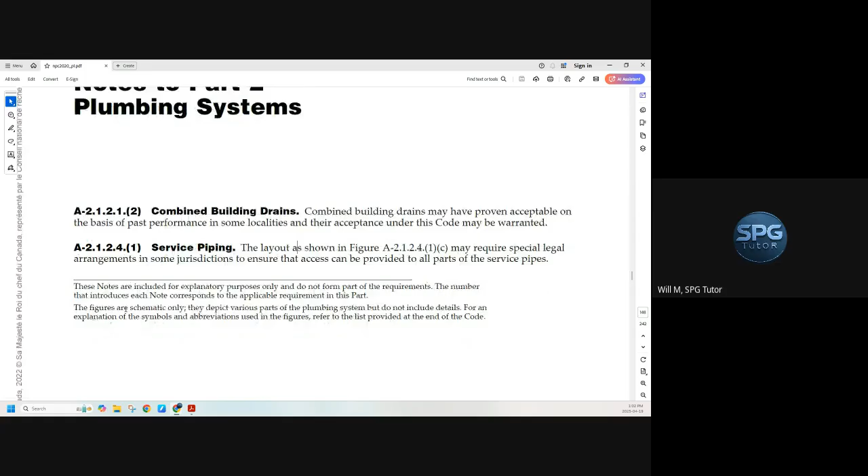Now, it says right here, these notes are included for explanatory purposes only, do not form part of the requirements. The number that introduces each note corresponds to the applicable requirement in this part. So yes, it is for explanation, but being one of the people who actually writes these exams and is part of the committees that do that, we take them off the pictures because you guys never look at them, right?

So give you an example off this first drawing, there are 4 potential red seal questions you might get off of it. The first one with the first picture is: can I feed an auxiliary building with the same services on the same property? So that could be a garage, could be a coach home. Yeah, that's allowed right here.

Can I feed a duplex or a townhouse with separate services? Yep, that's allowed too. Can I feed them with the same services? Yep, that's allowed, as long as there's independent shutoffs in both portions, or in all the portions. Then the last question is going to be: can I feed an adjacent property with the same services? And the answer is no.

Reason for that is because, again, you have to remember that no one knows what you're doing on your property.

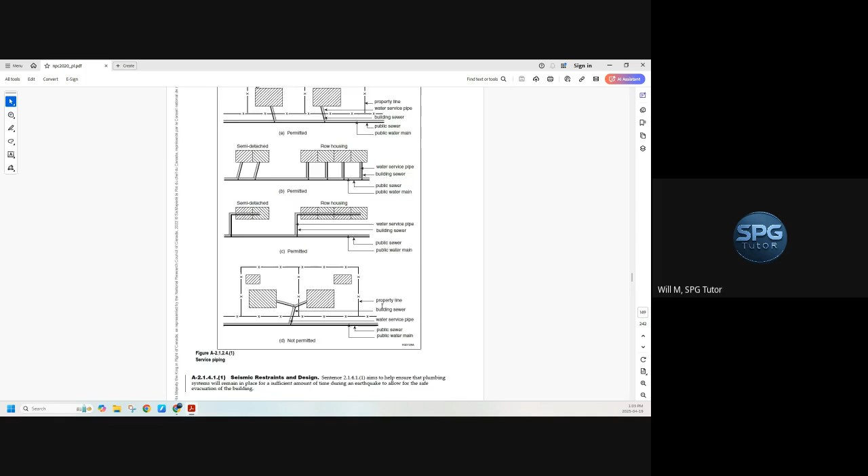Seismic restraints. So a lot of you guys don't have to deal with seismic across the country, but in places like BC, we're going to have seismic restraints that we have to put on hot water tanks and things like that, or even on the piping.

It's usually done by one of 2 ways on the piping. Either it's going to be a riser clamp with 1-inch pipe at a 45-degree angle going up to the ceiling, or it's going to be with aircraft cable. It's your other option.

This picture here, a couple of questions that you might get. How many shower heads can be served by 1 shower drain? Well, even though this says not permitted, you can count them, 6, right? If we look at this one, we've got 1, 2, 3, 4, 5, 6, 7, 8, 9, 10. How many shower drains do we need? 2. Okay, so every 6 needs a drain.

Now, the reason why we talked about this before, they don't want it sloping off to one central drain typically, and that's because no one wants your foot fungus, right? No one wants anything that might be on your body to touch them. It's not sanitary to do that.

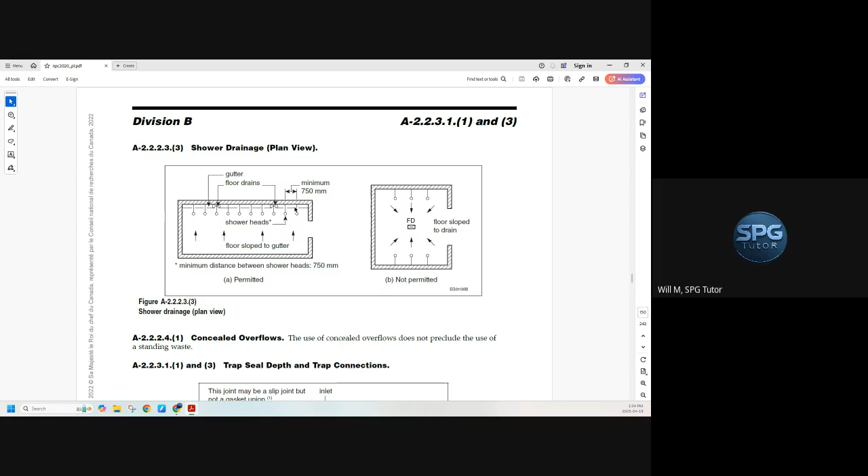Another question you might get on this is: what is the minimum distance between shower heads? Right here, 750.

Okay, concealed overflows. The use of a concealed overflow does not preclude the use of a standing waste. So a standing waste is basically a floor drain that comes out of the floor, usually for like a clawfoot tub or a Roman tub. Let me see if I can just find a picture that's a good one.

No, I can't. So I'll have to leave that for now. Oh, maybe. Here we go.

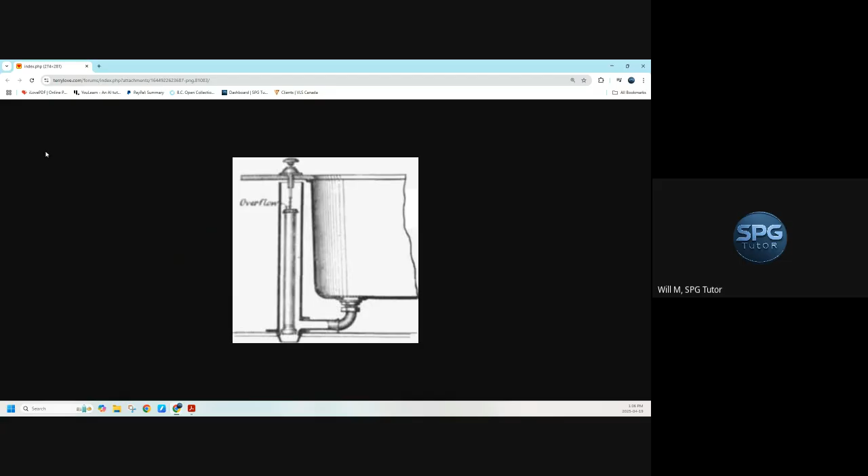Okay, so this isn't a very good picture, but you'll get the idea. So this is what a standing waste is. You can see here that we have an overflow in part of this tub, and if we want, we can pull up on this knob to activate it. Another image of what it might look like is something like that. So that's what it is.

It typically comes out of the floor.

That's your standing waste.

Okay, this picture here, A22311 and 3. So a couple of questions you might get from this is, where are we allowed to use slip joints? Well, we're allowed to use it to connect the tailpiece. We're also allowed to use it right here on the outlet after the P-trap. But we're not allowed to use gasketed unions here. We are allowed to use them here.

You might get a question, how is the trap seal depth measured from where to where? So that would be from the trap dip to the trap weir. Okay, so right here, so this is the weir, and this is the dip.

Next, prohibited traps. Except for an S-trap standard, S-traps are prohibited by Code Clause 25631B, which limits the fall in the fixture drains. Crown vented traps shown in that figure are prohibited by Clause 25631A, which requires that the distance from the trap weir to the vent be not less than twice the size of the fixture drain. So we all know that's code.

Now, a trap, okay, the two trap standards we talked about before. We have the P-trap standard, which is for janitor sinks, and then we have an S-trap standard, which is a toilet, essentially.

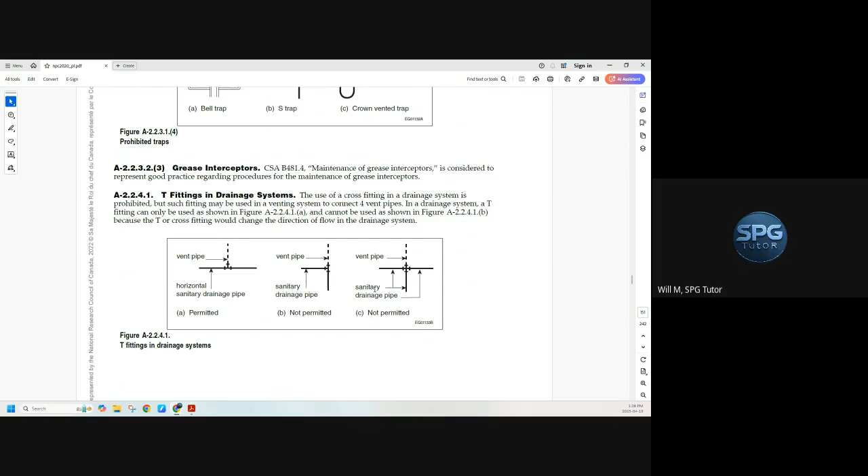And then same thing with Sani T's. Where can we use them? This says these are not permitted. It says use a Y and 1/8 bend. So just a reminder, the 1/8 bend is a 45-degree fitting.

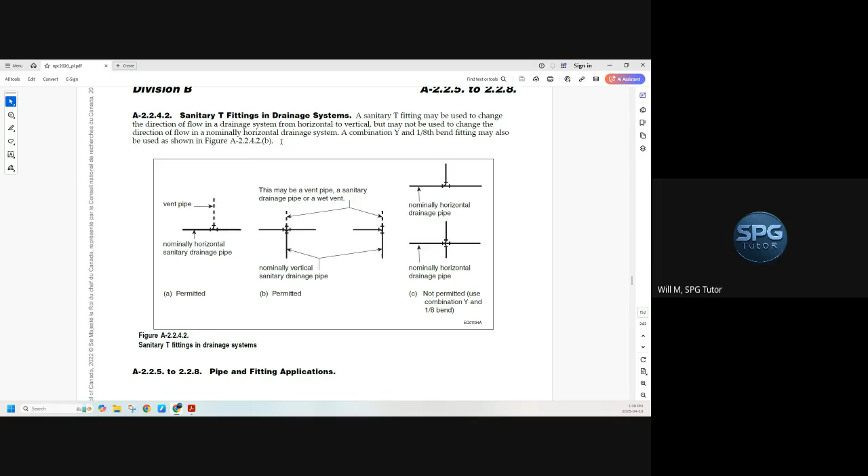And it says up here, a sanitary T-fitting may be used to change the direction of flow in a drainage system from horizontal to vertical, but may not be used to change the direction of flow in a nominally horizontal drainage system. So that might be important also.

This guy, your permitted, not permitted table. You will get probably quite a few questions on this. Now, again, depending on the edition of codebook you have, if you have a 2015 first edition, you're going to have asbestos cement pipe on this table, and you're going to have multiple references to asbestos. Don't worry about it. They can't test you on that anymore, okay?

Because it's not in the 2020. You're going to have a question on this. Polyethylene water pipe and tubing. Series 160 size with compression fittings. Okay. So where are we allowed to use it? Underground, under a building, and outside of a building.

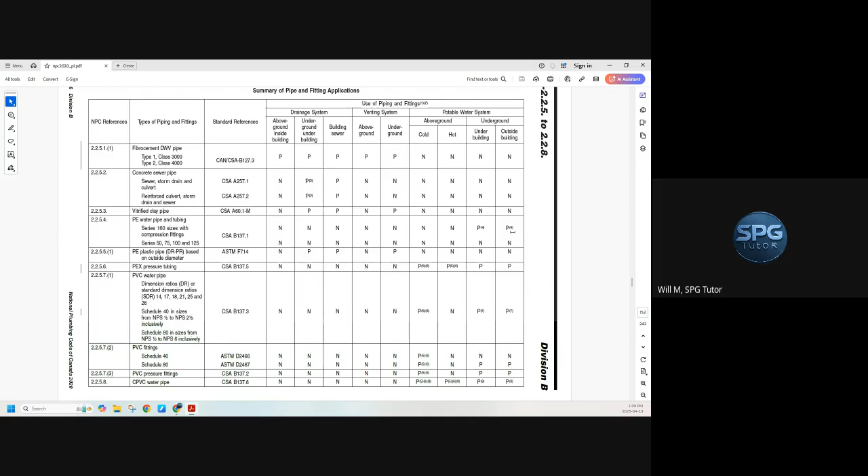So you see these little notes here, these numbers? Make sure that when you're going through this, you come down to here and you read what it says. So permitted only for water service pipe. So that Series 160, we've talked about it before, only for water service.

PVC, okay, we've talked about SDR numbers before. So if you remember, SDR refers to, it's called standard dimension ratio, and it refers to the outside diameter divided by the wall thickness. And off of tables, that can give you a standard pressure rating of that pipe. Now, again, with pipes with the same SDR, they're going to have the same pressure rating on both of those.

Yeah, so always look at these little numbers. And if you come across a question like this where you have to use this permitted, not permitted table, make sure you check out the code clauses that are in here also.

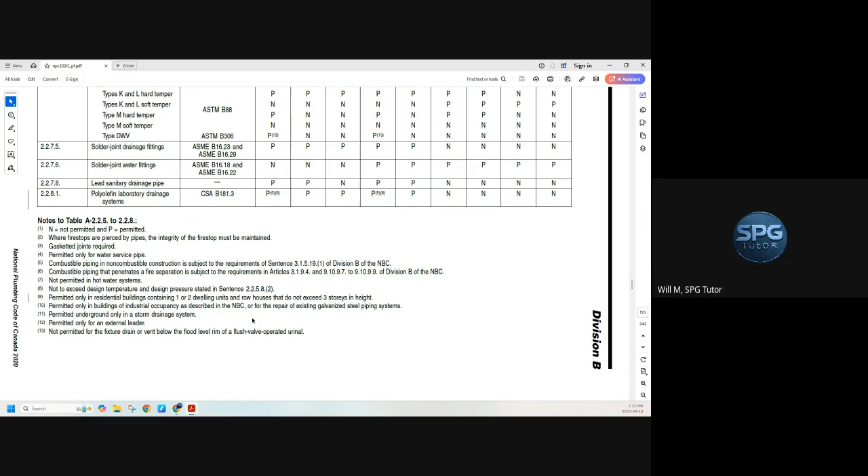So yeah. Now, remember down here, we always have these references throughout the code book, and I mentioned it a couple times. It says permitted only residential buildings containing 1 or 2 dwelling units and row houses that do not exceed 3 stories in height. So single family homes, duplexes, townhomes. There's multiple mentions in the code book about that. Okay.

All right, concrete pipe. No, we don't care about that.

This one here, A22551, polyethylene pipe used underground. So joints within high density polyethylene pipe, HDPE, is the same thing as polyethylene, just high density. Shall be heat fused according to manufacturer's instructions. Joints between high density polyethylene pipes and other materials shall be made with a suitable hubless coupling. There's two questions right there: how is a joint made in HDPE? It's heat fused with an iron, right? Or a hubless coupling, yeah, we can join it that way too.

Okay, solvent cement. Often this shows up, might ask you the color code, might ask you the color for transition solvent cement, let's say. So let's see where that is. PVC is gray, ABS is yellow, CPVC is clear, and transition is white. So if we're remembering what types of pipes we use with transition cement, it's ABS and PVC.

This guy we don't really care too much about. Nope, nope.

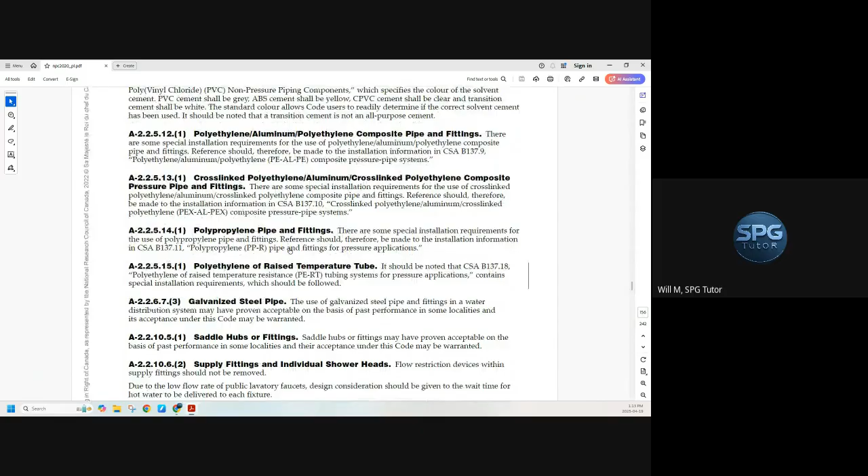Galvanized steel pipe, so this is similar to the combined building drains idea. It says the use of galvanized steel pipe and fittings in a water distribution system may have been proven acceptable on the basis of past performance in some localities, and its acceptance under the code may be warranted. So again, depending on where you are, if you're in the middle of nowhere, maybe it's allowed. Same thing with saddle hubs and fittings, so even though the code says we're not allowed to put those in, it may be acceptable in different places.

Okay, flow restrictors on shower heads. Some of you guys take them out just so you get beaten up by the shower every time, right? What this is saying, you got to remember where this is in the code book, it says flow restriction devices within supply fittings should not be removed. Again, it's not saying shall not, it's saying should not.

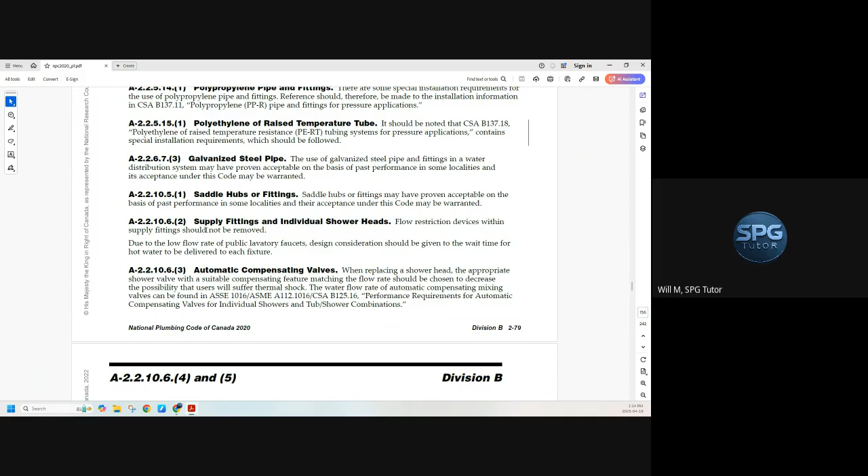Examples of water shut-off devices include occupant sensors and self-closing valves. So these are going to be for public facilities, and it's going to be your infrared sensors or your push-button timed valves.

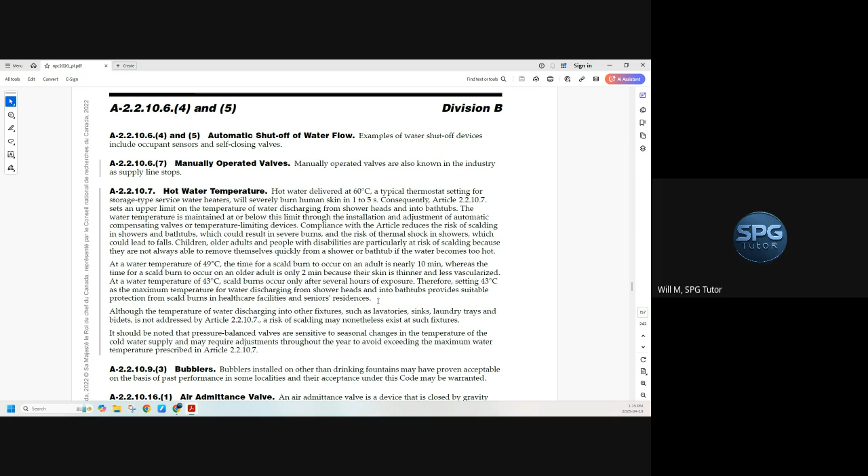Something that's different in the 2020 versus the 2015 is, remember the 5 temperatures that we need: it's 49, 60, 75, 99, and 540 from the code book. Now 60 is your hot water heater set temperature. We know that the maximum temperature discharging to a bathtub is 49 degrees. What they did in the 2020 was they added this, making it 43 degrees in healthcare facilities or seniors residences. Again, they won't ask you about this, but it's good to know for installation in the field, that it can only be set at 43. Reason why people who are sick might be more susceptible to heat, and old people typically have thinner skin, so they could probably burn a little bit easier. So that's a new requirement of the 2020.

Air admittance valves, do we need here? This is an important point: the material of the diaphragm can be damaged by exposure to acidic or corrosive fumes in ambient atmospheres. Therefore, air admittance valves should only be installed in locations where there's not a potential for exposure to such fumes. So that might be a question: where can I not install them? Well, anything that has acidic or corrosive fumes.

Okay, this one's fun. So you're going to have a coefficient of pipe expansion question. Everyone does, it's on all exams every single time. Now, if they don't give you a coefficient, what you want to use is this drawing, and this drawing isn't really that complicated to understand.

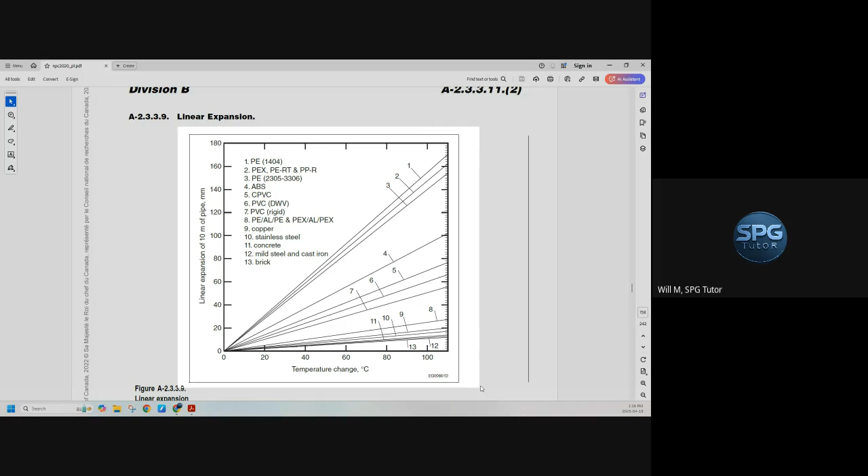I'll show you. Most likely they're going to talk to you about using ABS. But what we can do is, let's say the question says I've got 100 meters of, let's say, ABS pipe, install temperature is 10 degrees Celsius, and it's run at 40, whatever it is. Okay, so the first thing we do is we figure out the temperature difference, the delta T. So 40 minus 10 is going to be 30 degrees Celsius. So that puts us here.

Now, ABS is that line right there. So all you got to do is come up to the point where it intersects that line at 30 degrees, and then just draw a line all the way over. That's not very good, try that again.

That's better. It's more of a guess with this, but you can see here that this would be the 30 millimeters, so we're just slightly under that. I'd say probably 26, 27, right around there.

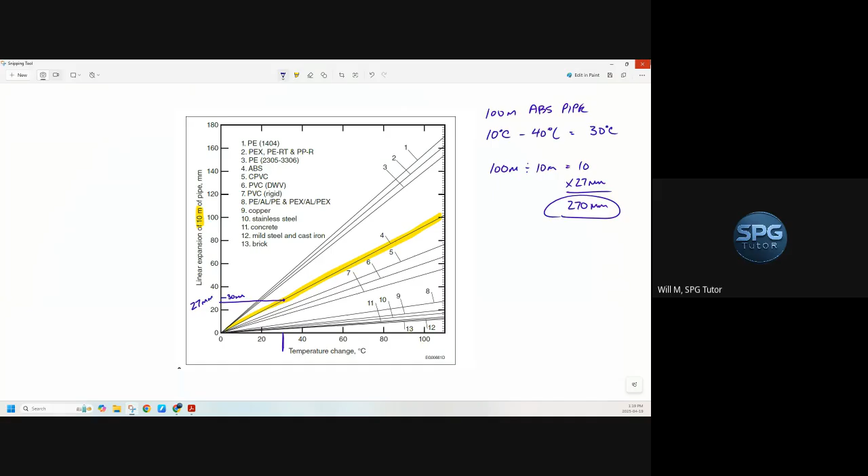So hopefully that works for you guys. Yeah, that's all you got to do, very easy. If you need an example, right here.

Okay, A23391, expansion and contraction. So expansion and contraction in piping systems may be accommodated in a number of ways, including but not limited to piping design and layout, material selection, and the inclusion of expansion joints. That might be a question you guys get - how can we do it? Expansion loops, expansion joints, different things you can do.

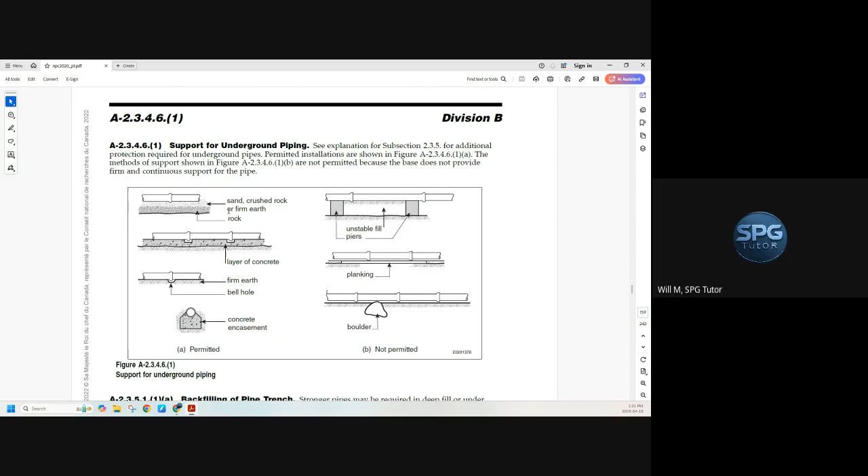What's not allowed? Piers, planking, and obviously a big boulder. I mean, no kidding, right?

Okay, backfilling pipe in a trench. There's a couple questions you might get off of this. The first thing it says is stronger pipes may be required in deep fill or under driveways, parking lots, etc., and compaction for the full depth of the trench may be necessary. But when we're dealing with the minimum, it's 300 millimeters above the pipe. Now this pipe could be installed 8 feet, 10 feet, 20 feet underground - it really doesn't matter. But what it's saying is we need to tamp down at least 12 inches of firm earth above it.

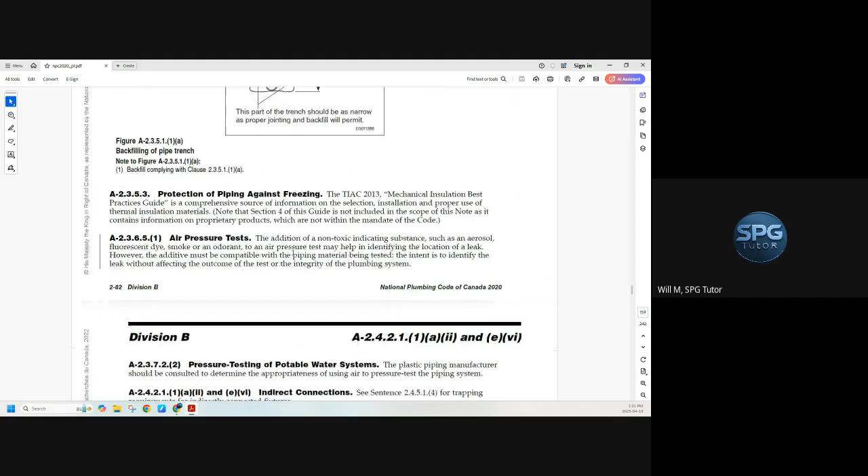This one here, A23651, air pressure test. So the addition of a non-toxic indicating substance such as an aerosol, fluorescent dye, smoke, or other odorant to an air pressure test may help identify the location of the leak. So I've actually done that, and because it does mention it in the book here, that's a more than fine answer.

What can you do if you're looking for a leak on an air test? So what we've done is sometimes perfume, sometimes air freshener - we just spray it down the pipe and then pressurize it with air. And then whichever room smells like perfume or aerosol, that's where your leak is.

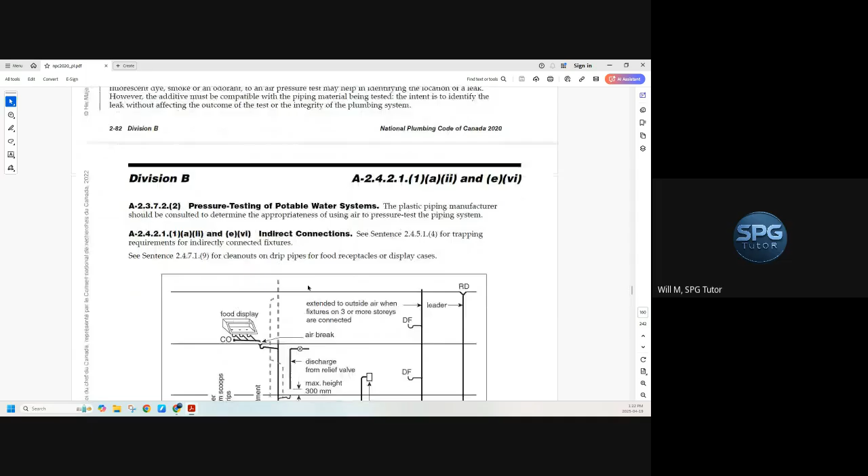This is a good point - pressure testing potable water systems. So the plastic piping manufacturer should be consulted to determine the appropriateness of using air pressure test in the piping system. So what they're talking about is things like CPVC. If you guys use CPVC, you should definitely check if your boss wants you to throw on an air test - check with the manufacturer, see if it's okay. Because what can happen is if you have weak piping, it can actually create a lot of shrapnel if it blows out, and obviously that's not a good thing.

Okay, this one, there are several questions you're going to see on the exam. How is a food display connected to a sanitary building drain? Well, it's trapped and indirectly connected through a trapped floor drain, right from the picture. What do we need to have on it? We need to have a clean out on the upstream side, right from the picture.

Down here we have a grease interceptor from a 3-compartment sink. So how is it piped? Well, it has a vent, and it is piped directly to the sanitary building drain. But what isn't is glass filler, ice cream scoops, coffee drips, and fridge and food compartments. Those have to be trapped and indirectly connected through a trapped floor drain.

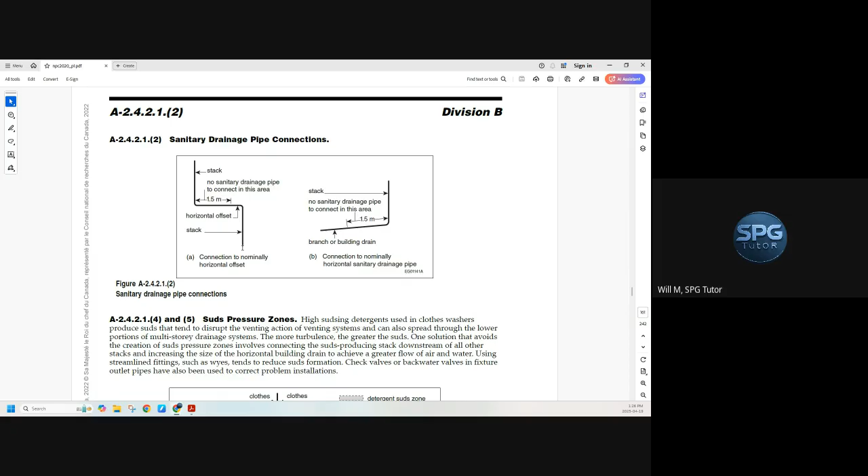Okay, this guy, sanitary drainage pipe connections. So this is a soil stack, and what it's saying is we're going from vertical to horizontal. So this picture is showing us that there can be no sanitary drainage pipe connections within 1.5 meters of that change, whether it's going vertical to horizontal or whether it's offsetting and then going vertical again. So that's a minimum.

This guy, you are going to get a suds pressure zone question, guaranteed. What I would do is I would match it to whichever portion of this picture it aligns with, and then get your answers from there. Now, remember this: it says 40 times the stack nominal pipe size, or 2.44 meters, whichever is less.

So if we do some math on that, let's say I have a 3-inch pipe, times 40, gets me 120 inches. And 120 divided by 12, divided by 3.281. So now, if it's a 3-inch pipe and it's saying 40 times the nominal stack size, so I use 3-inch. So it's giving me a minimum suds pressure zone dimension of 3.05 meters. But what this is showing us here is I don't need to go more than 2.44. So even though my math says it's 3, I don't have to go above 2.44 on that guy.

Yeah, so suds pressure zones compared to the picture, figure it out that way. Anything else in here? No, I think we're good there.

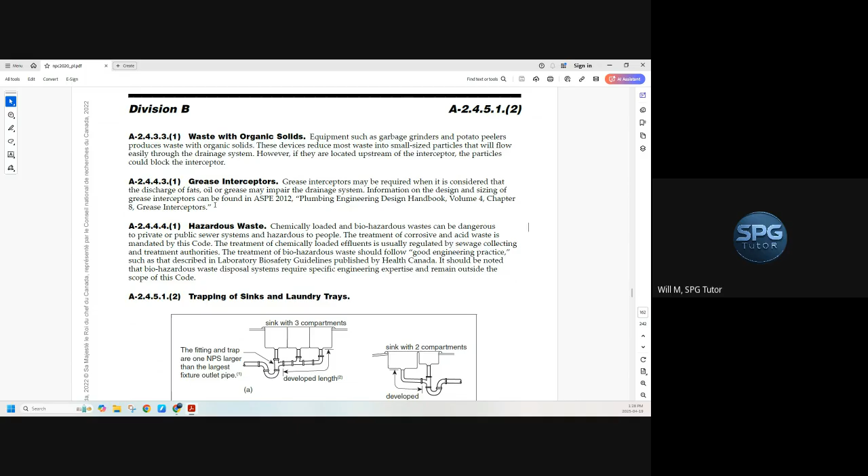This one here is just basically saying that anytime you guys cook bacon, make sure you dump it down the drain. No? Okay, you guys are having fun. All right, what else we got?

Trapping sinks. Okay, so what is the developed length, what is it measured from? Right there to there, there to there, there to there. What is it? 1,200 millimeters. That's going to be a question. So remember, a fixture outlet pipe is another word for a tailpiece, if you want to use the slang. And then this might be your next question on this picture: if it's a 3 compartment, the trap has to be 1 size larger. If it's 2, it can be the same size.

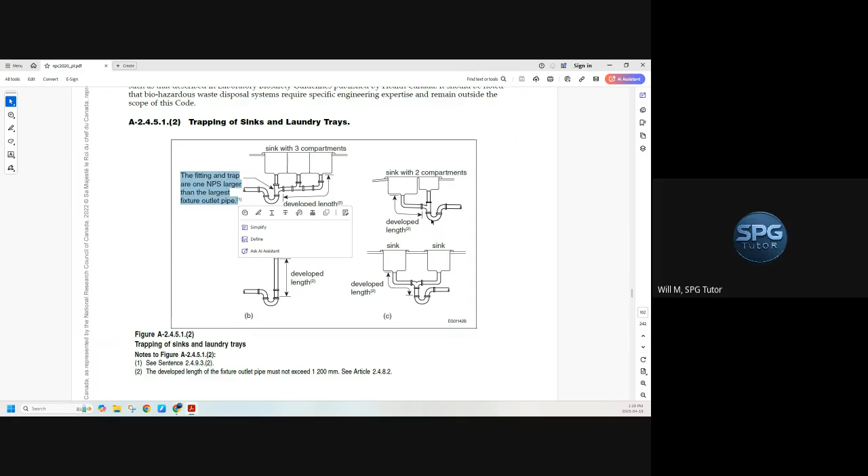Another question you might get is, what does not need to be left indirectly connected while servicing the fixture? Your options are going to be a food display case, a fridge or something like that, or a laundry machine. The answer is going to be a laundry machine. It doesn't need to be left indirectly connected, because we can just pull that little hose out. No big deal. Everything else would be hard piped.

Properly trapped and vented. This is important too. It says where an interceptor other than an oil interceptor serves a group of fixtures requiring more than one trap, each fixture must be properly trapped and vented. And then it says see Article 2552 for venting oil interceptors.

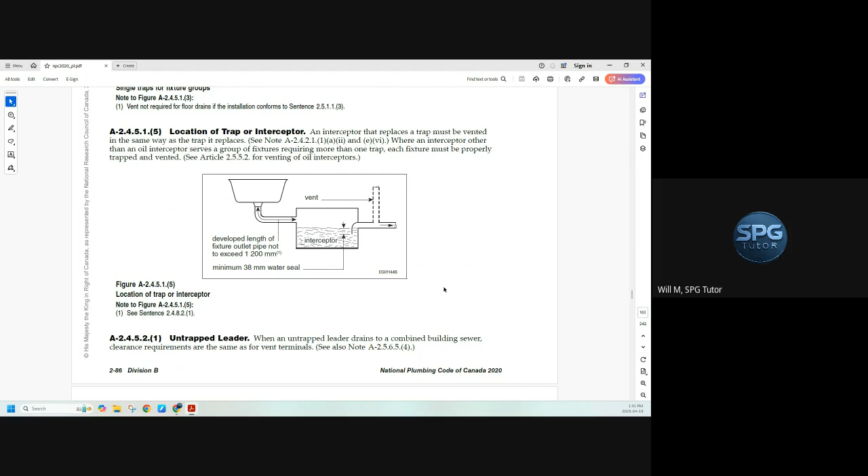24521, untrapped leaders. So when an untrapped leader drains to a combined building sewer, clearance requirements are the same as for vent terminals. I think we're going to see the vent terminals coming up, but just remember that. So an untrapped leader, if you ever get that question, make sure you check the back of the book.

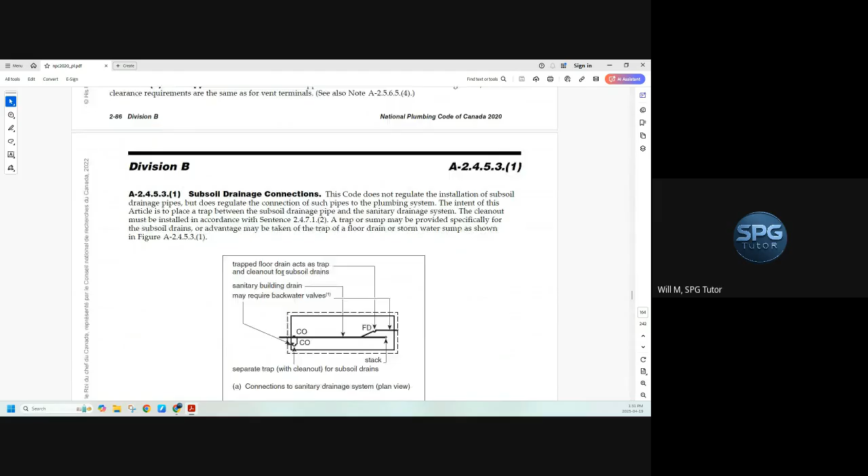Subsoil drainage connections. What do we need from this guy? Not really, except that it does say when we have connections to sanitary drainage systems or a trapped sump, they may require backwater valves. Now you have to remember too that we never have normally closed backwater valves, because that doesn't allow for free air circulation in the drainage and venting system. So it's always normally open.

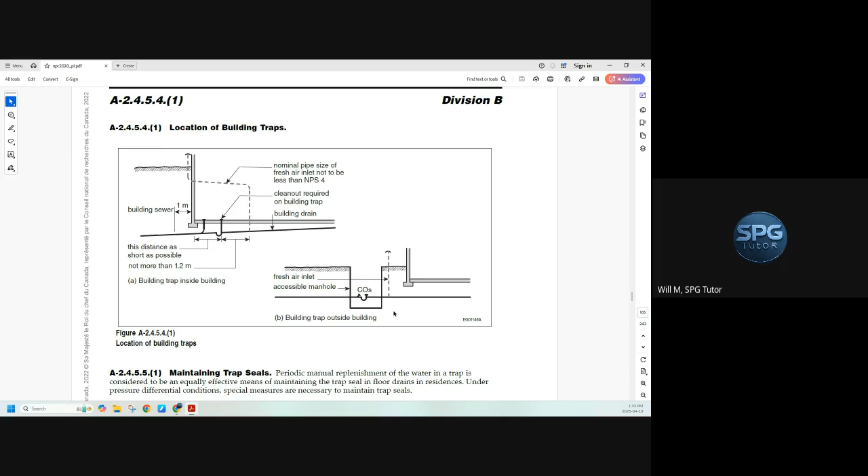Now, where else can we install a building trap? Outside in a manhole. But it has to be accessible, and we have to have a fresh air inlet.

Maintaining trap seals. Periodic manual replenishment of the water in a trap is considered to be an equally effective means of maintaining the trap seal in floor drains in residences. This is a key statement.

So you might get a question: do we need to install a trap primer in a residential floor drain? Answer is no. What you can do is instruct the homeowners to dump a liter of water down the floor drain every month, and that's considered an equally effective means of maintaining that trap seal.

Arrangement of piping at a sump. This is one you're guaranteed to get a question on. It says in most installations, controls will be installed in conjunction with a float to automatically empty the sump. If such controls are not provided, the capacity of the sump should equal the maximum inflow expected to occur in any 24-hour period. So if we have to manually turn that thing on, it needs to be a maintenance guy that comes in once a day, kind of idea.

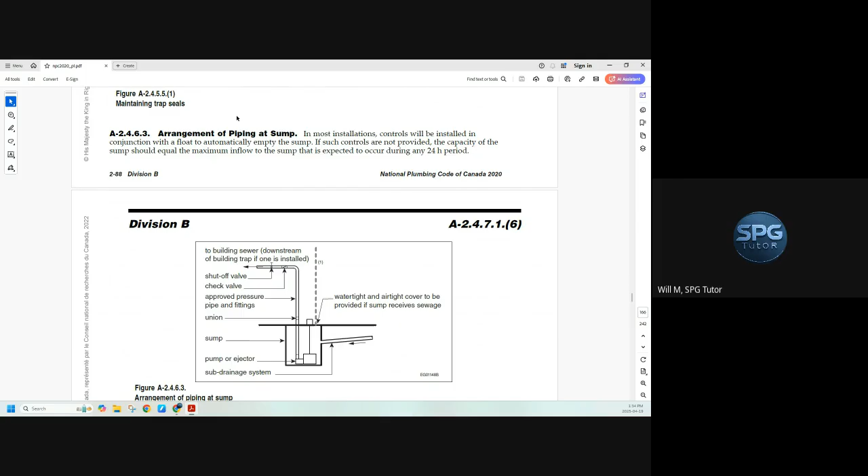Another question you guys are going to see is about these floats. It's going to say there's either the third or fourth float in a sump, and what is it for? It's your high-level alarm. The first two are your normal operating floats. Sometimes if there's 4 floats in a sump, the third one is just a backup or optional. But the question is going to be, what is the third float in a sump for? And that's your high-level alarm.

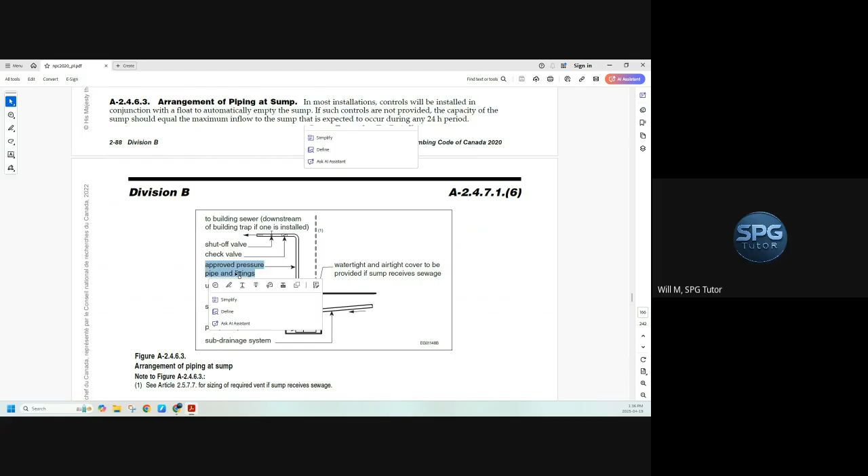Now the next question you're going to get on this: what valves or fittings are installed on the discharge side of a sump? Union, check, shut off, or union, backwater, shut off in the direction of flow - that's what the arrow indicates. These have to be approved pressure pipe and fittings. So when we go back to, I believe it's section 2.2, where they're talking about sewage sumps and force mains and things like that, that's what they're saying with the pressure requirements - that piece of pipe right there.

This point says watertight and airtight cover to be provided if the sump receives sewage. One of the questions you might get is, let's say we have a sump installed in a parkade on the 4th level. What do I need to make sure I have? And it didn't indicate in the question whether it was receiving sewage - it could be a storm sump. So it does not need a water or airtight cover unless it specifically mentions sewage.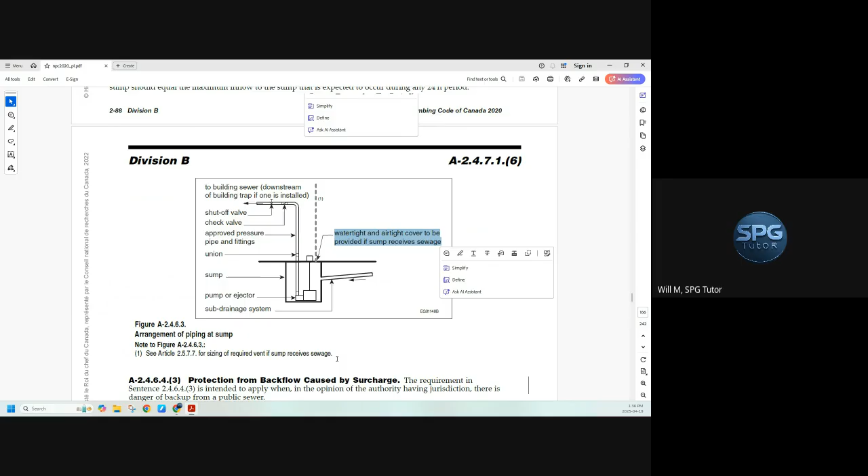And number 1, see Article 2577 for sizing the required vent if the sump receives sewage. Yeah, great, so there's going to be a couple questions on this picture.

A24643, protection from backflow caused by surcharge. The requirements in sentence 24643 are intended to apply when, in the opinion of the authority having jurisdiction, there's a danger of backup from the public sewer. Now this is a 2020. I think if you guys look in the same picture, if you have a 2015, it's going to also say that you can use gate valves on the fixture outlets instead of backwater valves.

So just remember that - I think it also mentions it in here too. This point here: subsoil drains connected to the upstream side of a trapped backwater valve or a separate trap and backwater valve. And then we just look at these sentences to figure out what it's talking about. So what can be installed on an individual fixture? Backwater valves. What can be installed on the drain itself? Backwater valves, right off the picture. Cleanouts.

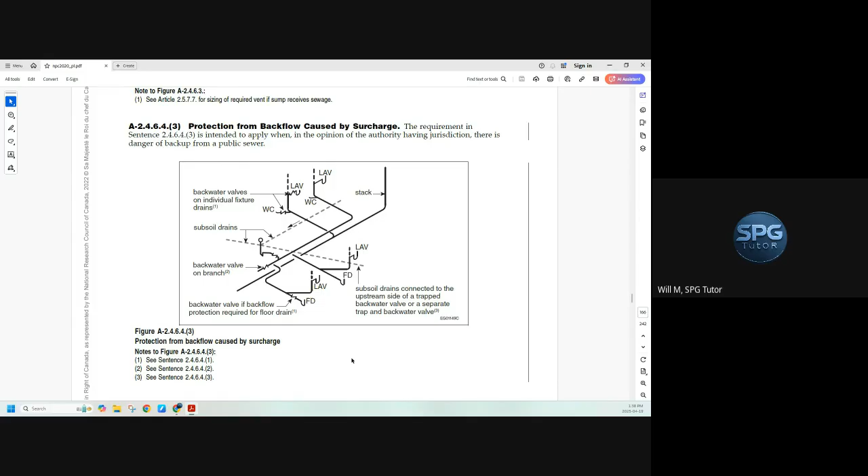So to accommodate the limitations of sewer cleaning equipment, the cleanout should be located as close as possible to the exterior wall of the building, either inside or outside, and be accessible for sewer cleaning equipment. So typically what I've seen is when they're running the stacks, even if they're on interior walls, they're usually close to the exterior walls. I don't know why that would be a big thing, but this one's saying it should be at least acknowledged.

Okay, food receptacles, what do we have? Clean out upstream indirect connection with an air break to a floor drain to the sanitary drainage system that is vented. Cool.

This one, cleanouts for fixture drain - a trap cleanout plug cannot be used as a cleanout for a fixture drain. So that's why we have to install a separate cleanout or have a union P trap. But again, when we're dealing with union P traps, they can't be buried - they have to be accessible.

A24811, minimum slope. So it says although slopes below 1 in 100 are permitted for pipes over 4 inches, they should only be used where necessary. Steeper slopes and higher velocities will keep the pipes clean by moving heavier solids that might tend to clog the pipes. So this just goes back to the tables where 3 inch and under has a minimum slope of 1 in 50, or 1/4 inch per foot, and 4 inch and above has a minimum slope of 1 in 100.

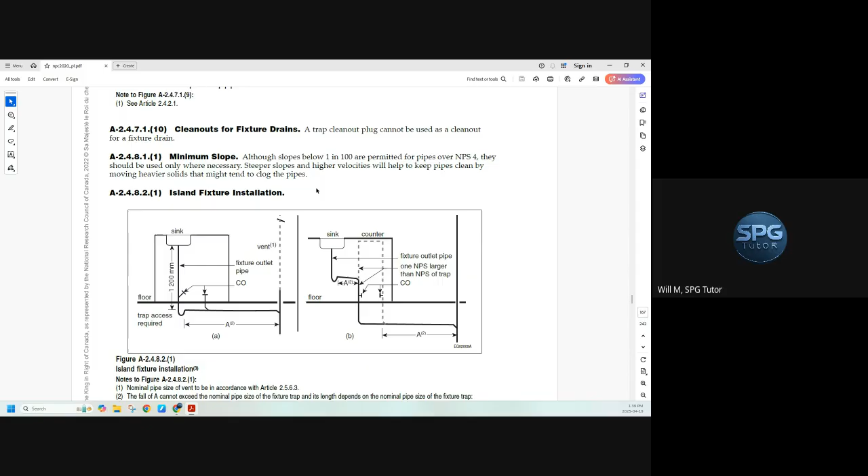Any kind of island fixture question, if you get one - I haven't heard of any lately, but if you get them, here's the picture, match it to the picture. Try and do your best to figure it out.

Okay, hydraulic loads for laundry trays and floor drains. When determining the hydraulic load on a pipe, no allowance need be made for a load from a domestic clothes washer when discharged to a laundry tray, since the hydraulic load from the laundry tray is sufficient. Also, no hydraulic load is required from a floor drain in a washroom, since it's for emergency use only.

So sometimes it's kind of weird, but if we have the clothes washer discharging into this guy, that's on this guy before the P-trap, that's when it's saying we don't need to account for the clothes washer. But in this case, we do.

You're going to get a question on this. What is the minimum length of standpipe? 600 millimeters, 24 inches.

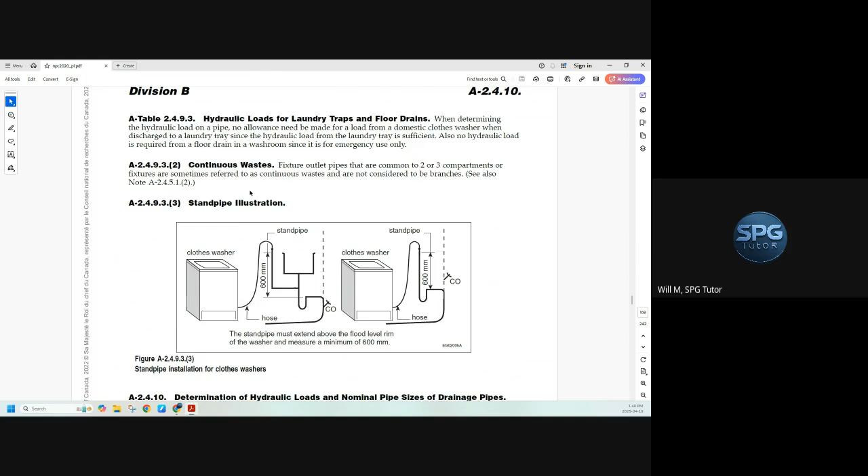Okay. Okay, that one. All right.

Pipe sizing, DWV. Your directions for doing so. So these are your rainwater drawings. Okay, sanitary, branches, stacks, building drains, building sewers. Determine the load in fixture units from all fixtures except continuous flow. So we do everything except a continuous flow. We need the liters per second for the continuous flow, multiply it by 31.7 to obtain the number of fixture units. Add the loads, use these tables.

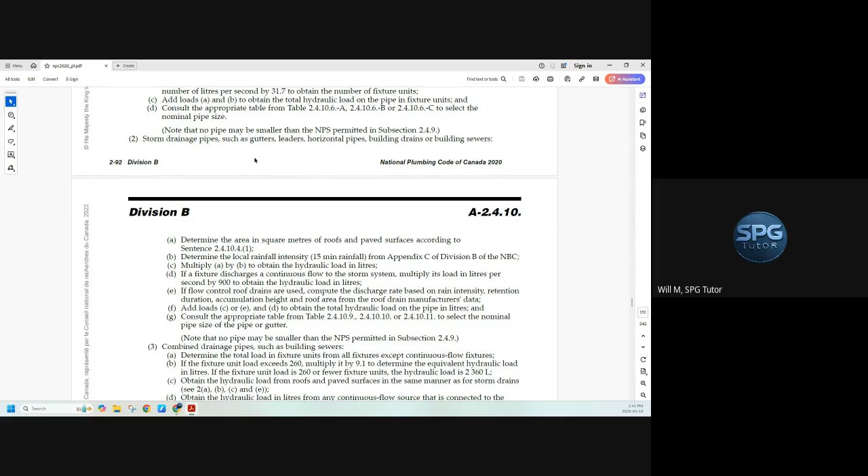So that's sanitary pipes. Then we have storm pipes and combined pipes. Now, just remember, whenever you're doing any of these, you're probably not going to get a picture. It might just be a simple question, like how many fixture units would be from a continuous flow fixture with 0.135 liters per second? Then it's multiplied by 31.7.

Now, remember, if it's a semi-continuous flow fixture, we don't use the 31.7, we use the table, 2, 4, 10, 12. So the only time we have to consider them the same is when we're multiplying the liters per second from a semi-continuous and a continuous by 900 to get the liters for a storm and combined system. But they have to be treated separately for fixture units.

Okay, so here are directions. Here we have storm, and here's combined. And then it goes through a couple of examples. Fantastic.

Some people are telling me they get questions on this. So remember, it's half of the largest adjoining wall area plus the roof area times the rainfall intensity gets you your liters into the roof drain or the rainwater leader. So with this one, it shows us that because this is 3.6 and 11 meters, that's a smaller wall, this one's larger. Now, the reason why it's only half is because if you think about how rain works, when it's hitting a vertical surface, some of it bounces over the roof line, some of it bounces onto the roof area. Water just bounces everywhere. So that's why we only need to account for half of it. Good enough.

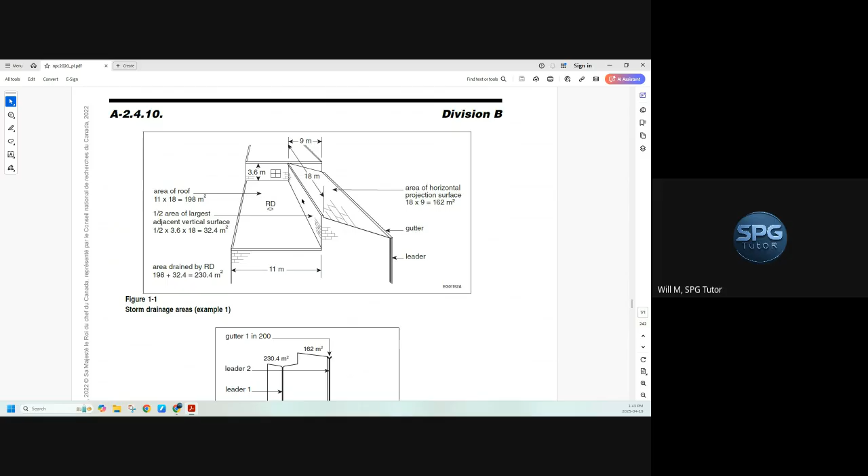Gutters. More examples. This one I don't think we need.

Okay, rainfall intensities. Where do we get that information? It comes from Appendix C, Division B of the National Building Code. There are tables for multiple cities across Canada with a whole lot of information, rainfall intensities, design temperatures for January, the coldest weather, for hydronic heating. They also have wind loads and wind speeds, for infiltration for hydronic systems. So it all comes off of that Appendix C, all that information for doing all of this work.

And remember this, calculating hydraulic load from a roof or paved surface, it should be noted that 1 millimeter depth on a 1 square meter surface is equivalent to 1 liter. So let's talk about that one because I know there might be some confusion as to why.

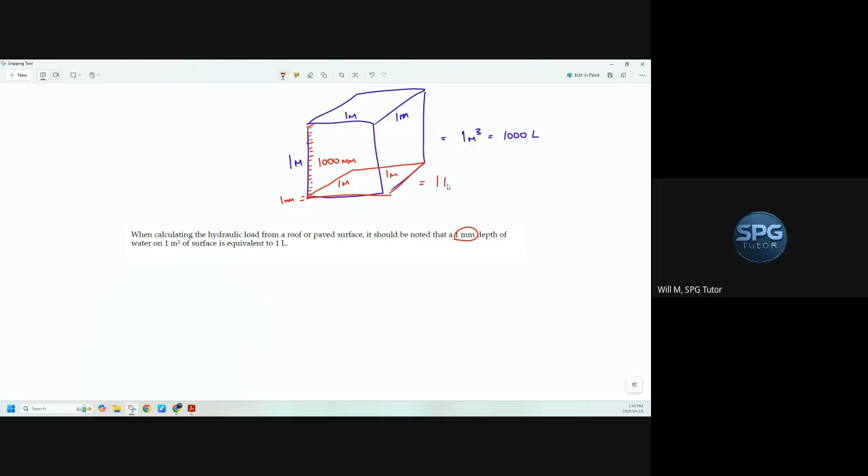Okay, so we have a box. This box measures 1 meter by 1 meter by 1 meter. So if we're looking at this box, we have 1 cubic meter, which equals 1,000 liters. Now, what we also know is that 1 meter is equal to 1,000 millimeters. So that's why this is saying 1 millimeter depth. Let's try that out. One millimeter over a 1 meter by 1 meter area equals 1 liter. And that's how that works.

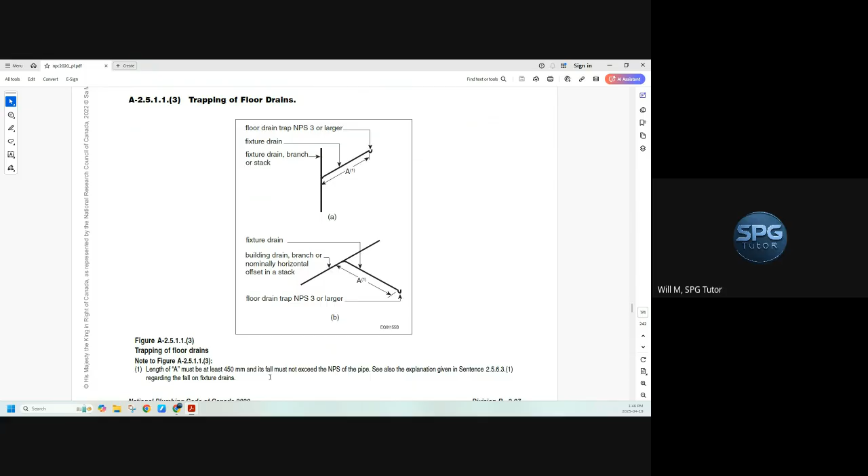All right. Okay, trapping floor drains. What do we need from here? So this is back to 2511 number 3. We're dealing with emergency floor drains, 3 4-inch emergency floor drains. I'm just saying the minimum trap arm length is 450 on those guys. Everything else is double the size of the pipe.

Okay, wet venting. I'm not going to go through any of this. This just lines up. Each code clause in the wet venting and circuit venting section has a picture, so if you're confused about what it's talking about, what it's meaning, just come back and look at these.

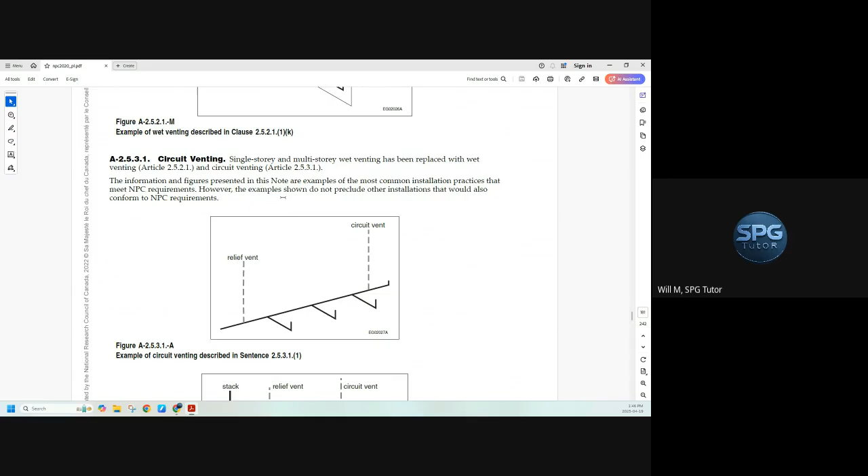Okay, circuit venting, not going to go over any of that. This is going to be a question, most likely. What do I need to install on the branch, on a circuit vented branch, when I have a change in direction of more than 45 degrees? It's an additional vent. That's what you need to do.

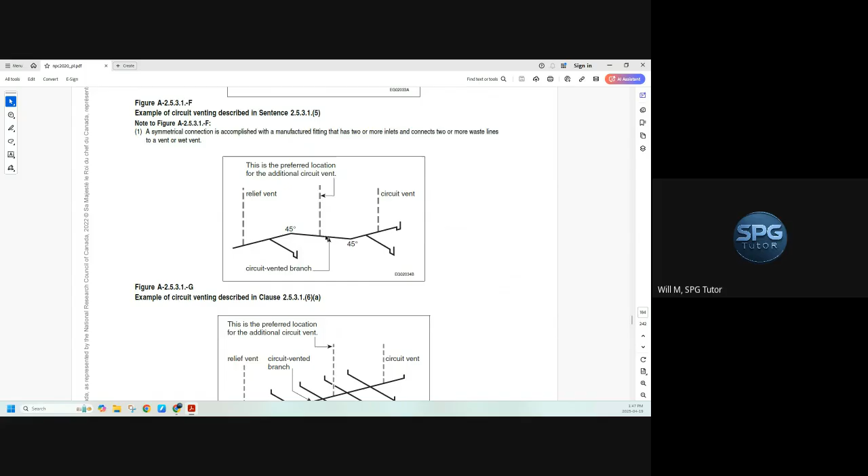If I have more than 8 fixtures located between the circuit and the relief, I also need an additional vent. Where is it located? Off of the first image that we saw in Division A, between the 5th and the 6th most upstream water closet.

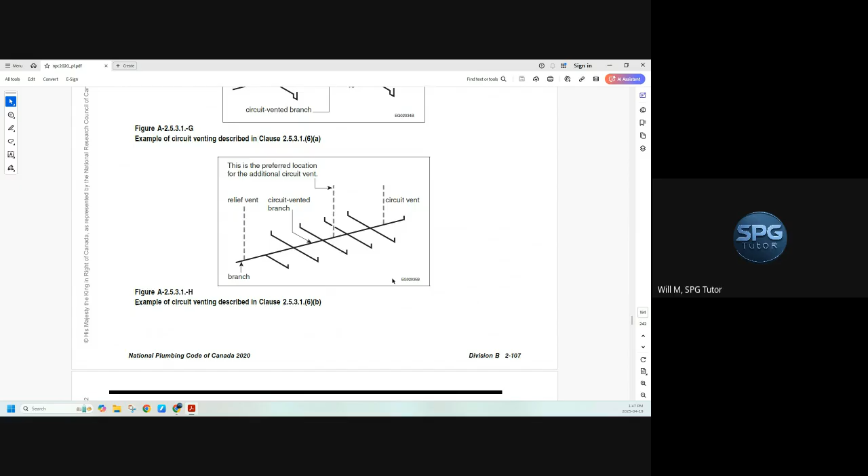Now remember, on a picture like this, I have 1, 2, 3 toilets. That means this portion of pipe, because everything is symmetrically connected to this point, or maybe on a double Y, let's say this is 4 inch. 3, 3, 3, 4, right? Now the other thing too that we should talk about with this is, remember that we're allowed to use a stack as long as it has 6 fixture units or less as our relief. But since these pictures say more than 6, that's why we have to have the relief here.

Okay, what else? Yoke vents. That's how they're connected, so you're going to get a question on this. What's required if we have fixtures draining from more than 11 stories? We need yoke vents. Now remember, where are they installed? Every 5 stories from the top down.

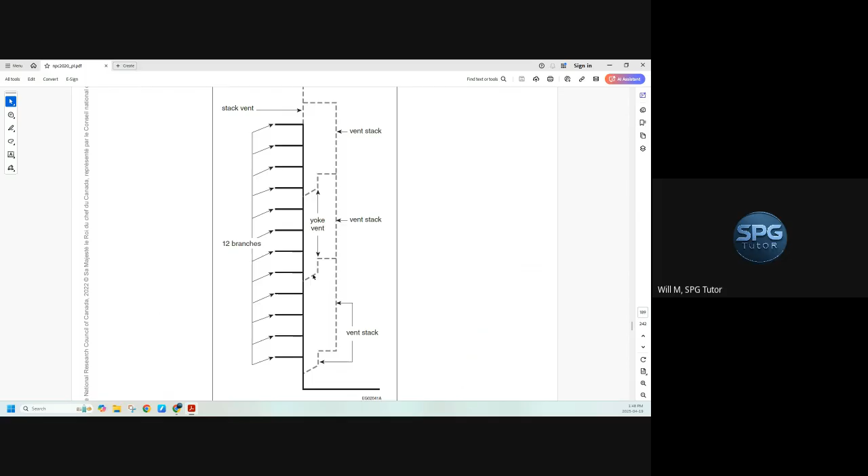That's why we have soil or waste stack offsets, that's why we need to know about them, because we may have to install offset relief vents. Now we have to check both of these boxes: the offset has to be bigger than 1.5 meters, and we have to have more than 100 fixture units above the connection. So if you get a question and it says, on a soil or waste stack offset that is 2 meters long and drains 50 fixture units, do I need to install an offset relief vent? No, because it has to meet the 2 requirements. It has to be more than 100 fixture units, more than 1.5 meters. So it's great that it's 2 meters, but I only have 50 draining to it, so I'm good.

But remember, because it's 2 meters, I need to size it off the branch table or the sanitary building drain table. Right, so it has to have a grade on it.

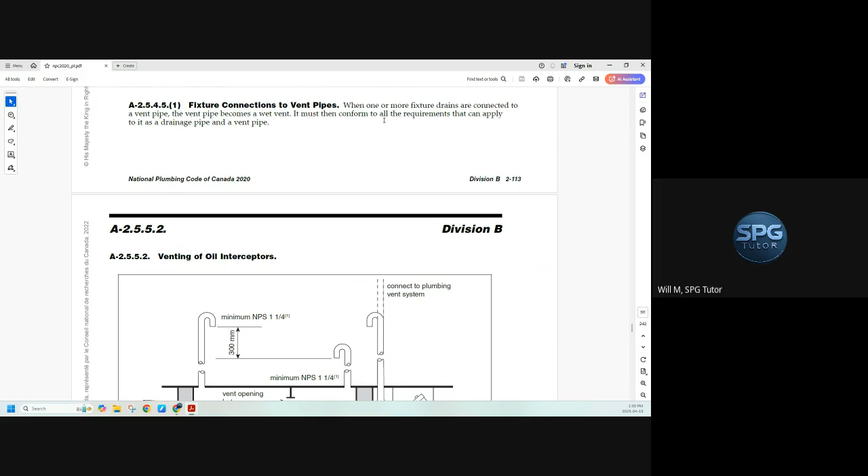Okay, oil interceptor questions, always a couple on those. What is the minimum size vent for an oil interceptor? 1.25 inches, right off the picture. What is the height difference? 300 millimeters. Where are the vents located? On opposite ends. What's required in the tank? Well, we need a vent opening between the compartments, so we don't have a vacuum condition happen. What's required downstream? A clean out.

Don't worry about this guy. What else do we need from this? I think that's it. So there's quite a few questions on those.

Vent pipe connections. Okay, fittings used to connect vent pipes to nominally horizontal sanitary drainage pipes are specified in subsection 2.2.4. And it says, except for wet vents, vent pipes must be connected above the horizontal center line of the pipe.

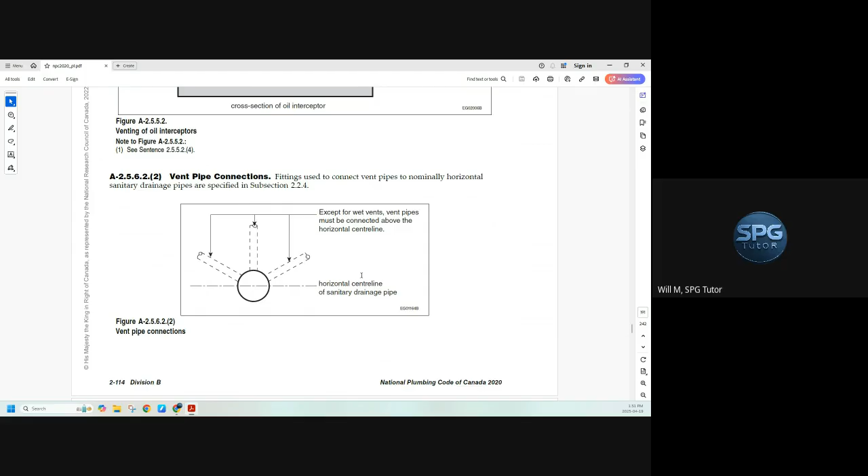This might be a question. What is the maximum change in direction on a trap arm? Regular fixtures are 135. Toilets, we're allowed to throw an extra 90 on there, so we're allowed 225.

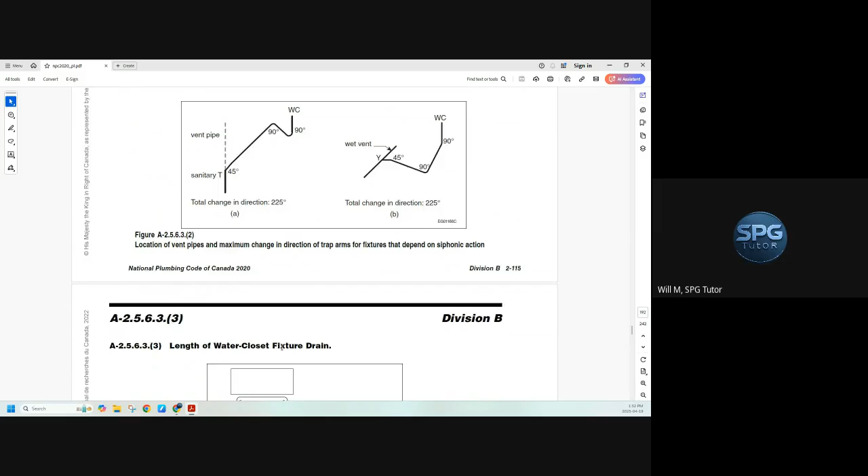This might be a question. What is the maximum trap arm length for a water closet? Answer, 4 meters. 1 vertical, 3 horizontal, 4 total.

What does this apply to? It says, the following length and water closet fixture drain applies to floor-mounted and wall-hung water closets.

Vent terminals, this is my favorite. Always a couple questions on this guy.

Questions might be, how far from an openable window on an adjacent building does a vent pipe terminal need to be? 3.5. How high above a fresh air intake? 1. How far away? 3.5. How far above an openable window on the same building? 1. How high above the roof line? 6 inches.

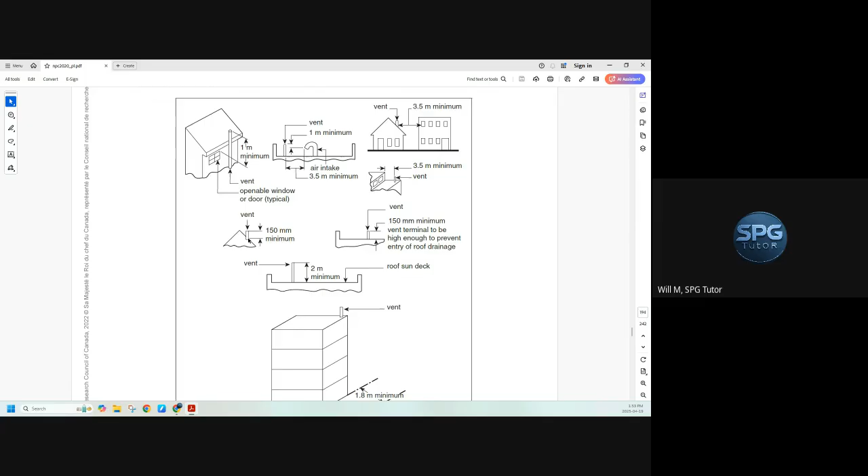How high above a roof sun deck? 2 meters. How far from the property line? 1.8. So if you guys remember back to the septic image that I've shown some of you guys, all of these numbers are the exact same numbers on the septic drawings. You see that the numbers keep repeating, right? The 30 meters, the 15 meters, the 1.5 meters, the 1 meter, they all keep repeating in every single aspect of plumbing.

This 150 millimeters, very, very common number.

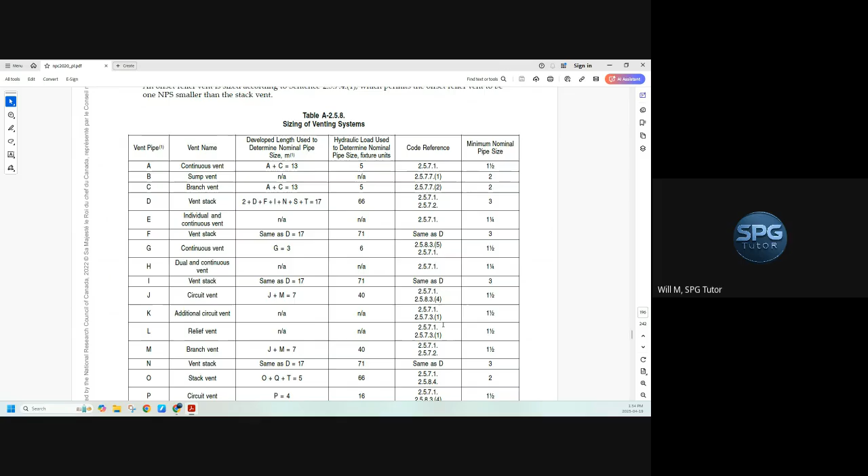If you're ever confused about how to size these vent pipes, go to this picture and there's a table that describes the exact process on how to do it, what you need to include, what you don't, and then a code reference number. So that's pretty handy.

So, sizing relief vents. Length is not taken into consideration when sizing a relief vent and an additional circuit vent. A relief vent connected to a circuit-vented branch is sized according to sentence 2.5.7.3.1 and 2. An offset relief vent is sized according to sentence 2.5.7.4.1, which permits the offset relief vent to be one size smaller than the stack vent. That's a question.

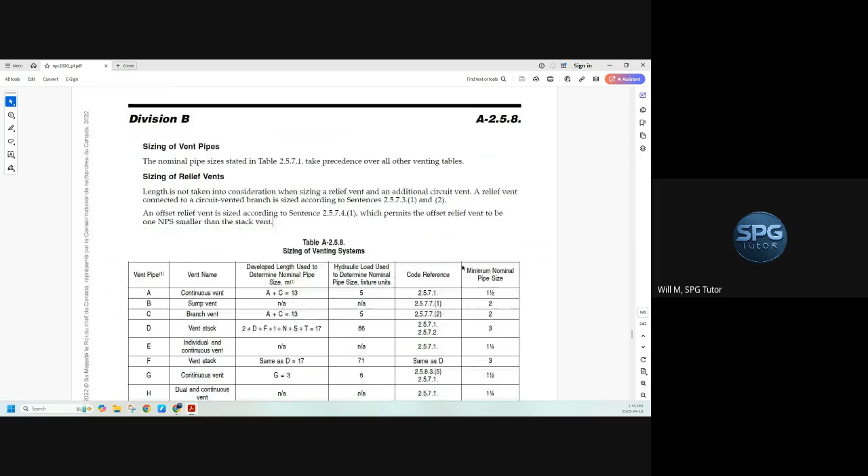Well, for some of you. Okay.

Lengths to be considered, another picture if you want to look at those. Vent pipe lengths to be considered when sizing vent stacks and stack vents are as follows. There's another picture showing you how to size those, what the lengths are, you need to add together.

Shutoff valves. Multiple risers convey water supply to dwelling units. Each dwelling unit's water distribution system shall be provided with a shutoff valve located immediately where the water piping enters the suite so as to isolate the fixtures as well as the water distribution piping serving the dwelling unit's fixtures. Fixture stopcocks or shutoff valves located immediately adjacent to a fixture may not be adequate to protect the water distribution piping. Where a dwelling unit is served by a single shutoff valve on the water supply, additional shutoff valves may be required to achieve compliance with sentences 2.6.1.3.4 and 7.

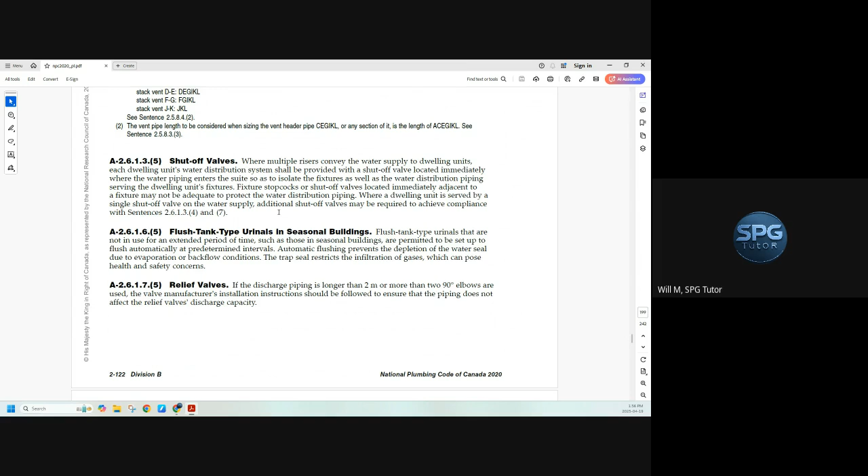2.6.1.6.5, this one's good too. Flush tank type urinals that are not in use for extended periods of time, such as those in seasonal buildings, are permitted to be set up to flush automatically at predetermined intervals. Automatic flushing prevents the depletion of the water seal due to evaporation or backflow conditions. The trap seal restricts the infiltration of gases, which pose a health and safety concern.

One of the questions I've heard lately, and some of you guys have probably seen it, is what needs to be done to winterize the drainage system in a seasonal home, like a vacation home? The answer would be putting plumber's antifreeze in the traps. Now, some of my students have actually told me what they do in situations like that is they just use windshield washing fluid because it's cheap, and it can usually handle down to like -40. So they just dump that in the P-traps because it's relatively non-toxic.

So there's an option for relief valves. If the discharge piping is longer than 2 meters or more than 2 90-degree elbows are used, the valve manufacturer's installation instructions should be followed to ensure the piping does not affect the relief valve discharge capacity.

You may get a question on relief valves, and to be honest, I don't know the answer for sure, I have my best guess. One question might be, how do you size a relief valve on a boiler, for instance? My best guess is it's either manufacturer's instructions, or if that's not an option, I'd go with minimum 3/4 inch. And if you have written answers, I'd also consider that the size of the boiler or the size of the hot water tank would determine the size. So there are 3 potential answers, and I don't know which one you'll get.

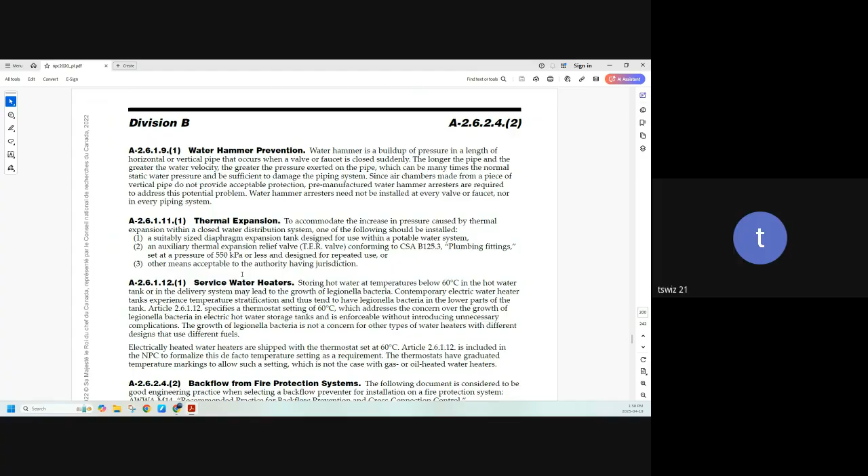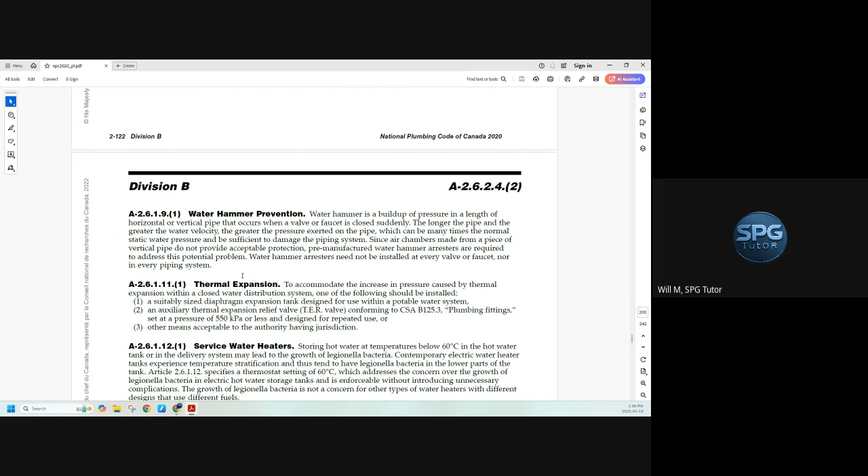What if you got all 3 as options? It's not going to be all 3, it'll be one or the other. Did you get a question with all 3? I got one with 2 out of the 3. Which 2? Manufacturer and 3/4. I would just go manufacturer on that, because it may be bigger. Yeah, the minimum is 3/4, but manufacturer is going to tell you exactly how big it is. Again, that's my best guess.

Service water heaters. Here's your temperature for water heaters, 60 degrees. What does it prevent? The growth of Legionella. It says the growth of Legionella bacteria is not a concern on other types of water heaters with different designs that use different fuels, so the only place we're really worried about it is electric hot water tanks. If it was gas-fired, potentially it wouldn't be a problem. That's what it says here, which is not the case for gas or oil-heated water heaters, so just electric.

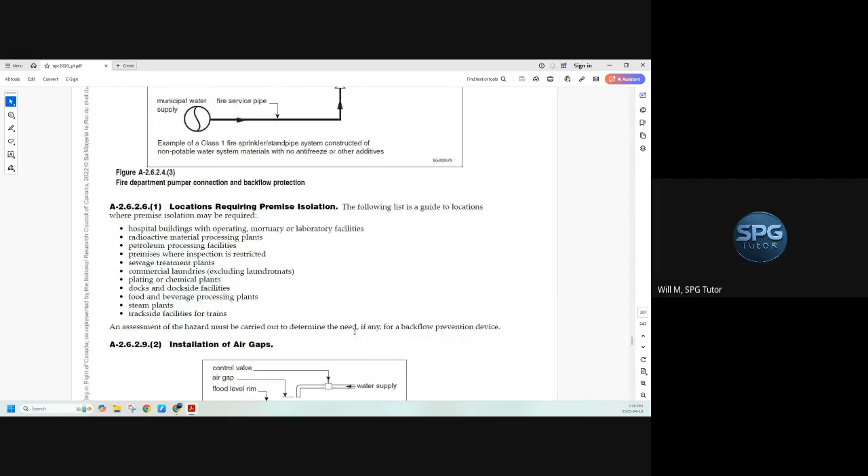When we're dealing with what devices are good for back siphonage and back pressure, we check code clauses 2622 and 2623. If you guys remember, anything with vacuum breaker in the name is only good for back siphonage, not back pressure, I've mentioned that a couple times. With this list, the one you're most likely going to get is dock and dockside facilities. What kind of premise isolation do we need for that? Just remember DCVA, that's the minimum. All of these other ones are RPs, every single one, minimum RP. RP, DCVA, RP, RP. Now with sewage treatment plants, best is RP, but you could also throw an air gap for that, which is why air gap is right underneath it. Pretty interesting, huh?

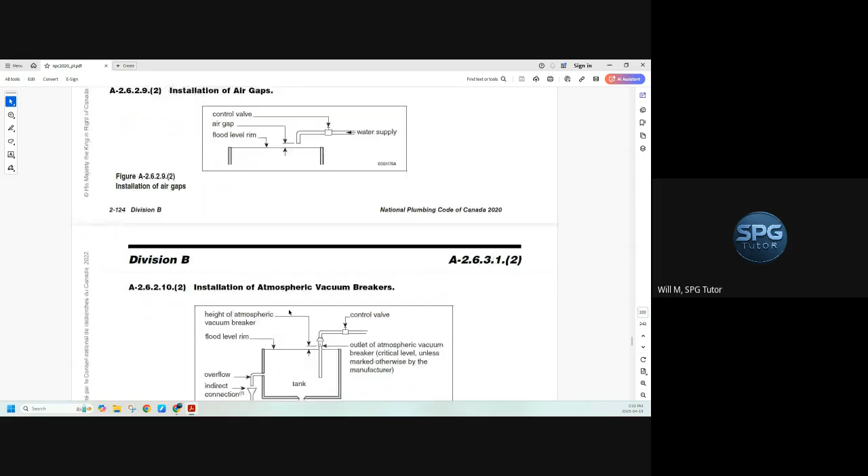Atmospheric vacuum breakers, flood level rim. Don't need any of that.

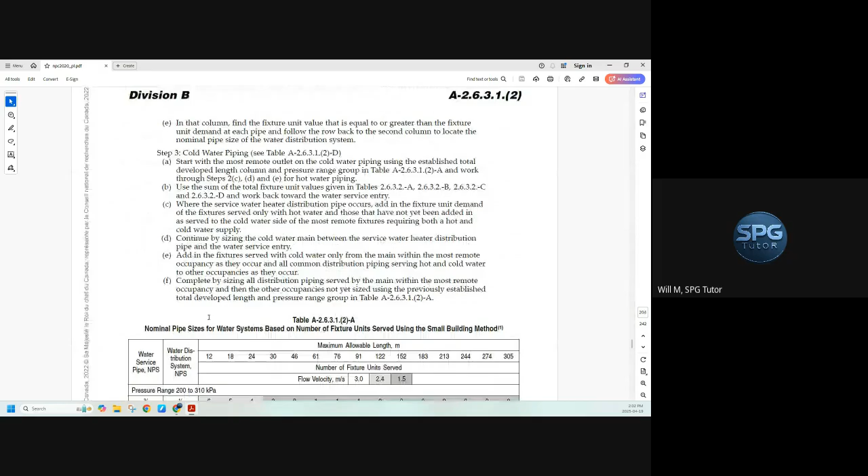Here's the small building method for water pipe sizing. If you guys haven't gone through that with me yet, you will at some point. Remember with this, the water velocity is based on the manufacturer's recommendations, always. But when you're doing this, remember that for PEX, 3.0 for cold, 2.4 for hot. With copper, 2.4 cold, 1.5 hot.

Now if you guys watch that dude, Mathematic Plumber, don't, because he screws it up every time. The way he shows you is you find your governing fixture length, let's say it's 27 meters, so now I'm in 30. And what he shows in the video is you just go straight down and size it based on going straight down, but that's not the case. You have to use the shaded area that corresponds with the velocity inside the pipe. So if I'm doing copper cold, 27 meters, 6 fixture units, boom, right there, we're in the light shaded gray, 6, half inch for distribution, service is 3/4.

That brings up a good point too: what is the minimum size of water service pipe? 3/4 inch, none of these are smaller. Distribution, oh, we're allowed smaller, we're allowed half inch or 5/8.

What else about these guys? This point here, where the total fixture unit values exceed those given in this table, the system must be designed according to a detailed engineering design method. All right, so what does that mean? Okay, let's say I have...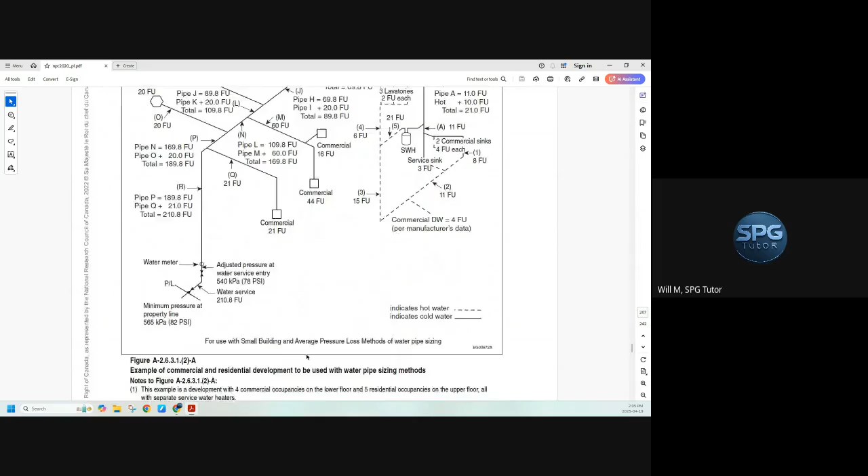Okay, here we have the average pressure loss method. Here is your table if you have to do this kind of math on your test. Now, sometimes people get confused with this one down here.

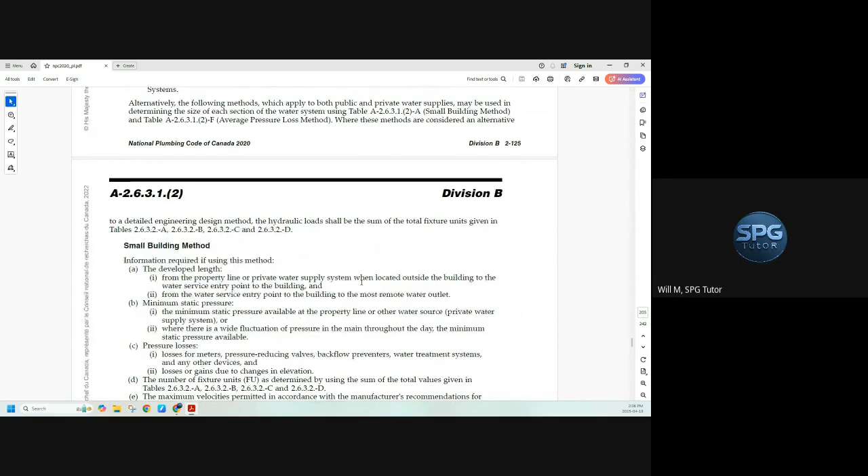All right, what else? Average pressure loss method - again, walks you through exactly how to do it. Oh, and the other point I wanted to make about this one, where is it? This always confused me for some reason.

So to calculate the total equivalent length for the water distribution system, determine the developed length from the water service entry point to the building to the most remote water outlet. Where the fitting inside diameter dimensions are at least equal to the NPS, multiply the developed length by 1.5 to allow for friction losses. And where insert fittings are used, apply additional losses in accordance with the fittings manufacturer's data.

So what these are talking about is we know that copper fittings - the copper pipe fits into the copper fittings, and then we solder or braze it, or use compression or whatever else. But with PEX, the fitting actually fits into the pipe. So that's what it's trying to get at. It depends on what type of pipe we're using, where we have to have this 1.5 meter, or 1.5 times the governing fixture length.

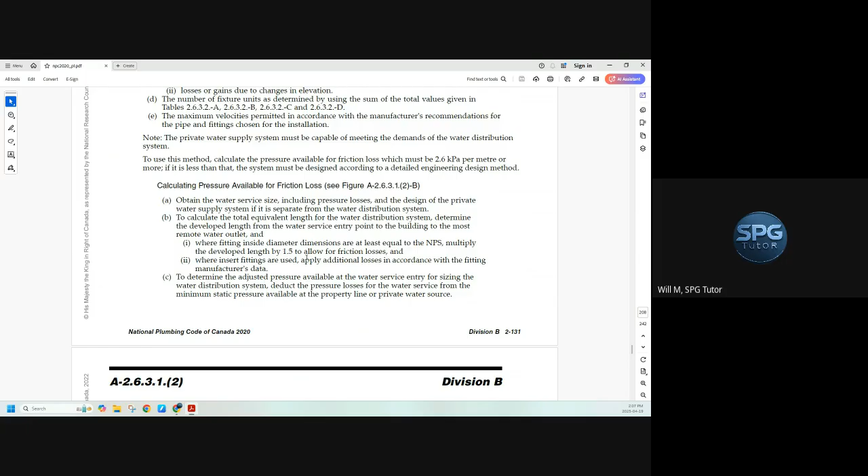Now, what I've been told over the years is if you're doing the average pressure loss method, multiply it by 1.5 anyway. But I'll leave that up to you guys to decide what you want to do if you get something like that. Wait, when do you multiply it by 1.5? The governing fixture length - so let's say we're using the example of 27 meters, I would multiply that by 1.5 to be able to use the tables. Oh, okay.

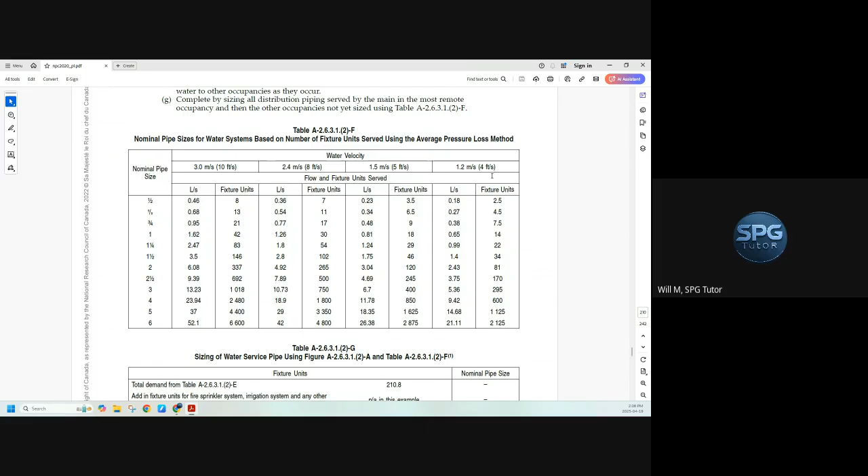Now, this book does some really strange stuff right in here. So what they did - they have a number of fixture units, and it makes sense, liters or meters per second on all of them. They put in 1.2, which I'm assuming is for hydronic heating. It's the only thing I can figure out or guess. All right, what else do we need from this? Nothing there.

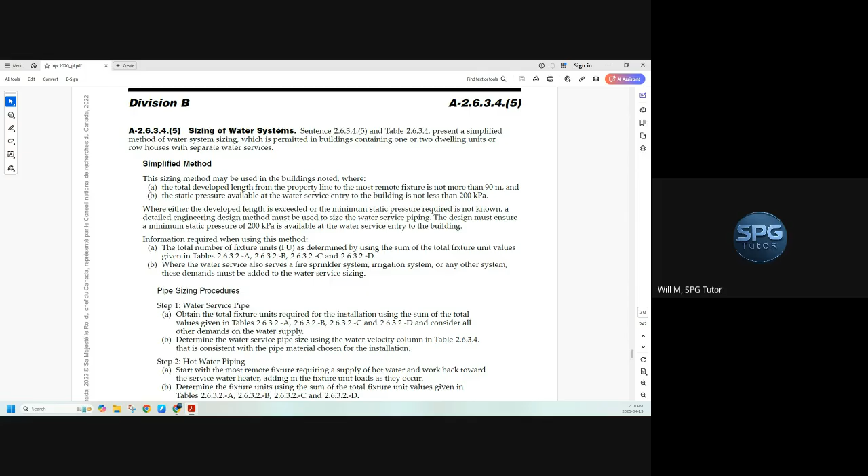But when we're doing it, design must ensure that the minimum static pressure of 200 kPa is available at the water service entry to the building - so the minimum is 200. And the total developed length from the property line to the most remote fixture is not more than 90 meters.

Now, you guys know the questions you'll see - water main pressure is 800 kPa. What is done to reduce the pressure to a fixture? And that would be to turn it, I believe, counterclockwise down to 550 max.

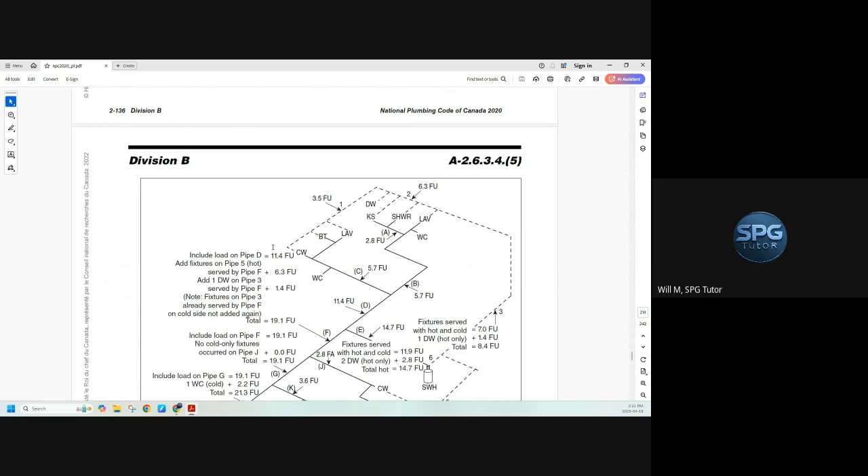Something's there - a couple pictures, something I do want to show with this. So, water distribution piping - now in the DWV table 2493, and if we look at the potable water line table 2632A, it does mention bathroom groups in both. The reason why it does is because one person can't physically use all three fixtures at the same time - well, I guess you could, but it'd be a complete waste of water, right?

So what they allow you to do, if we have that bathroom group, is figure the worst case scenario. Let's say you start filling up a bathtub and you go and use the toilet before you have a bath - so you flush a toilet. That's the worst case, because the toilet has 2.2 fixture units and the bathtub is 1.4. Add those together, that's 3.6. That's the worst case scenario, which is why they tell you it's 3.6 for the bathroom group on the water lines.

Now, if we have any other fixture connected to that piping, like a clothes washer here, and a kitchen sink on the opposite side, we have to add all of these up separately. So it would be 1.4, 1.4, 0.7, 2.2 - that gets us 5.7. Same with this: 0.7, 1.4, 1.4, 2.2, that's 5.7. So if there's any other fixture connected to it, we can't use bathroom group.

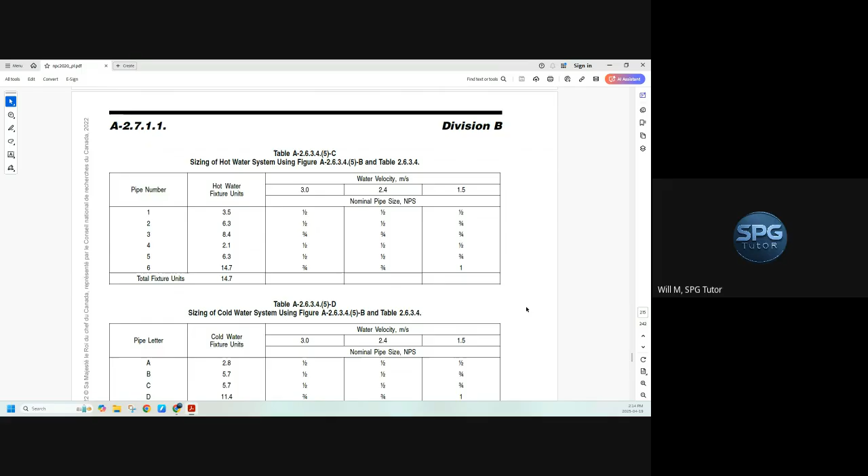Now, this is where they do something really strange - I don't know why, but they put the fixture units on this side and then size it for each of the water velocities. I don't know, I guess because they don't really specify what the velocities are. Could be.

Non-potable water system design: there's a growing interest in Canada in using available non-potable water supplies in place of potable ones for selected purposes, such as flushing water closets and irrigating lawns and gardens. Article 2711 applies to non-potable water systems regardless of the origin of the water. The non-potable water must meet the applicable water quality standards as determined by the authority having jurisdiction - they're the ones who tell you, but in the same respect, we're allowed to use it for toilets and for irrigation.

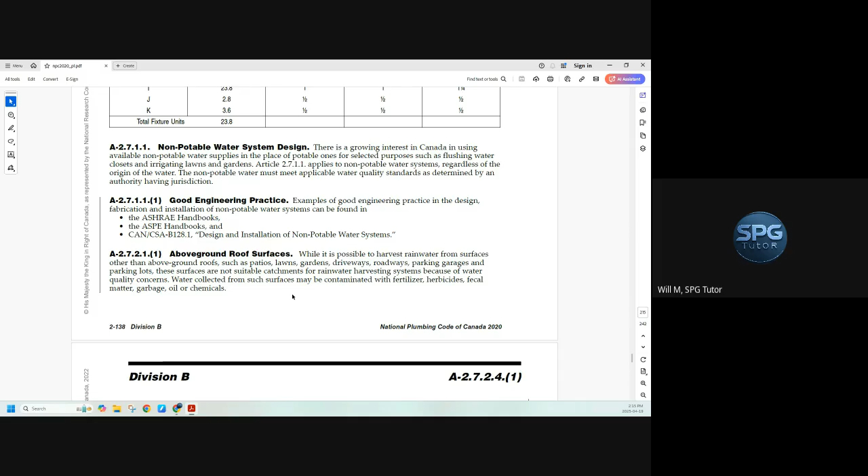Okay, this is important too. Above ground roof surfaces—it's possible to harvest rainwater from surfaces other than above ground roofs, such as patios, lawns, gardens, driveways, roadways, parking garages, and parking lots. These surfaces are not suitable catchments for rainwater harvesting systems because of water quality concerns. Water collected from such surfaces may be contaminated with fertilizer, herbicides, fecal matter, garbage, oil, or chemicals. That fecal matter they're talking about could be bird droppings, or from any kind of animal—squirrels, rats, whatever.

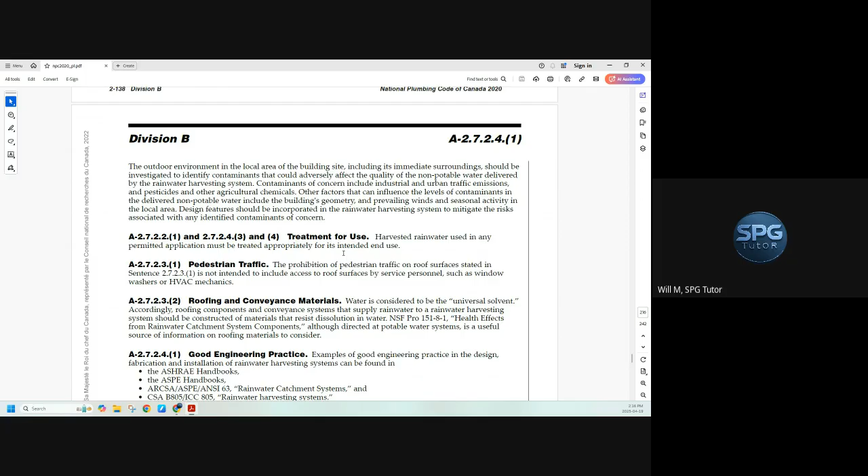What else do we got here? Okay, 2.7.2.2.(1) — treatment for use. Harvested rainwater used in any permitted application must be treated appropriately for its intended end use. Pedestrian traffic: the prohibition of pedestrian traffic on roof surfaces stated in sentence 2.7.2.3.(1) is not intended to include access to roof surfaces by service personnel, such as window washers or HVAC mechanics. Now, I don't know that you guys have all of these code clauses in your 2015 code if you're using that, but it's still a good idea to go through it.

One question in particular with non-potable water—I think I've talked about it before, but I'll mention it anyway—is that anything non-potable is going to be identified with something purple, right? So whether it's purple banding, purple insulation, purple writing, or purple pipe, something purple indicates non-potable. So rainwater is technically considered non-potable.

Okay. And anything in here? Nope, nope.

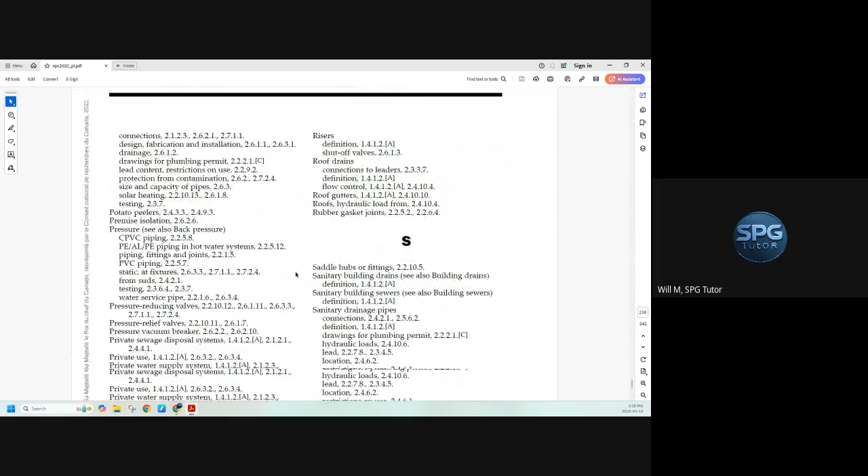There's one more thing I want to show you guys. I don't think we need any of that. The index—if you guys use this, great, but for the most part I don't really find it too valuable. Knowing where to look, knowing what section to look in, is probably a better idea. But it might help you guys, I don't know.

All right, the very last page of the book has common abbreviations. So if you're ever in doubt as to what something's called, it's right there. These ones are key because they give them to you, and they can technically ask you about it.

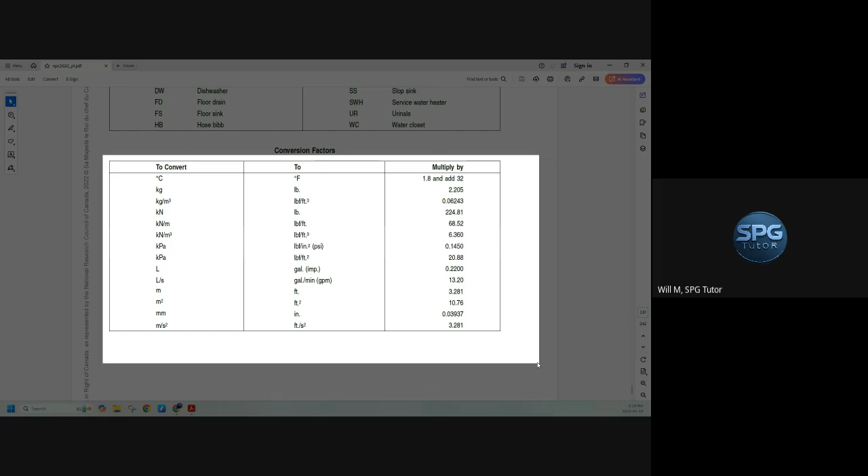So let's say I have a question that says I have a continuous flow fixture that discharges 50 GPM. How many fixture units would that equal? Okay, there's a couple things you got to do. It says right here, to convert liters per second to GPM, multiply by 13.2. We want to go the opposite way, so from GPM to liters per second we divide. This way is multiply, this way is divide.

So we take our 50 GPM divided by 13.2. What did we get? 50 divided by 13.2 equals 3.79 liters per second. Now, because I know it's a continuous flow, I can multiply that by 31.7, and that gets me my fixture units, which is 120. That's a lot, but that's how you do it, with the numbers in the back.

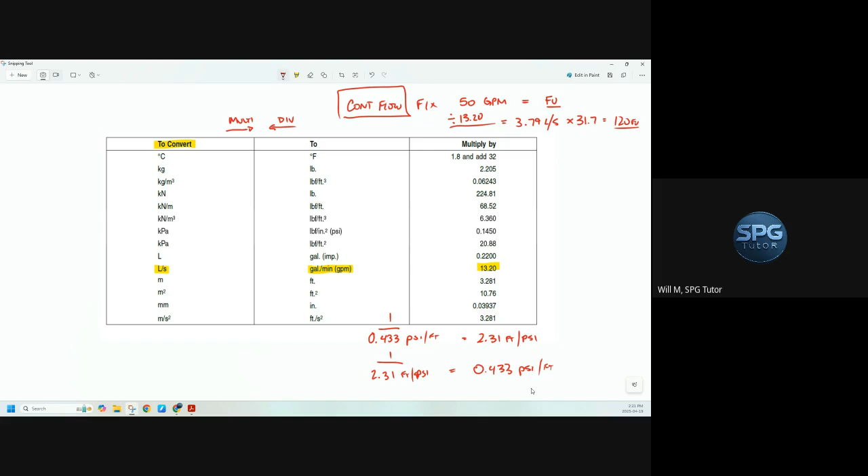So having known that, if you only know one of the numbers, you can get the other just by doing 1 divided by that. That would also apply to U and R values for heat loss calculations. So any of these numbers, you can do the opposite. Let's say we want kPa to PSI—oh well, I've never seen that 0.145 number. Let's see if we do this: 1 divided by 0.145. What does that give us? 6.896, close enough, kPa per PSI. So we can get the other numbers if we want, right off the numbers in the back.

Pretty fun. That is it. I think we're done.